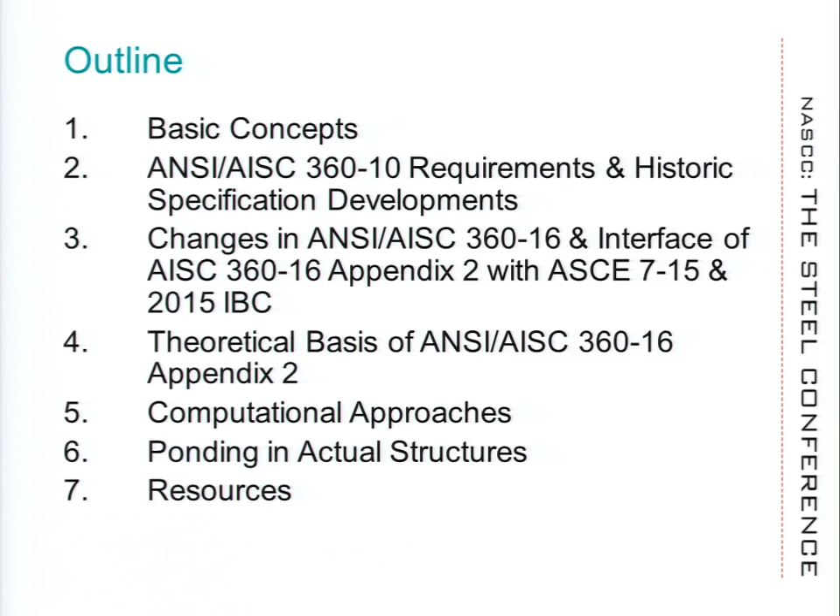Starting off with ponding, the first definition is from a roof contractors association point of view. It says that ponding is water that remains on the roof 48 hours after a rain event. That's not the ponding that we're interested in as structural engineers. There are other ponding definitions.

One that comes out of the SJI Technical Digest starts off with ponding being a condition where you have uncontrolled water and it changes the assumption of your design. That's not really a very good definition of ponding either. AISC has a definition that says it's the retention of water solely due to the deflection of the roof.

We tend to look at ponding as a process that causes progressively increased deflections that eventually would stabilize, hopefully, or lead to collapse. And we'll look at the conditions where one occurs versus the other.

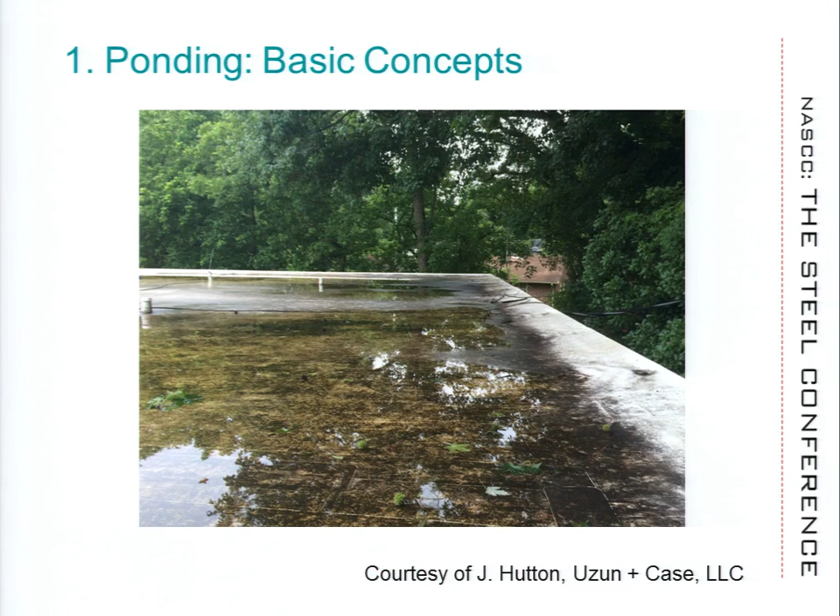Just a slide of what ponding looks like. This would be a kind of roof condition where this water stayed more than 48 hours, where it didn't cause any issue. It represents a condition where the roof got into equilibrium.

Basically, the idea of ponding is you have a nominal deflection due to an initial load. Due to that deflection, there's rainwater that accumulates. It deflects further. More rain results in more deflection, and the cycle either stops and converges, maybe because the rain event has stopped and there's not enough water, or the structure is designed such that the rainwater just overflows. So your input is equal to your output.

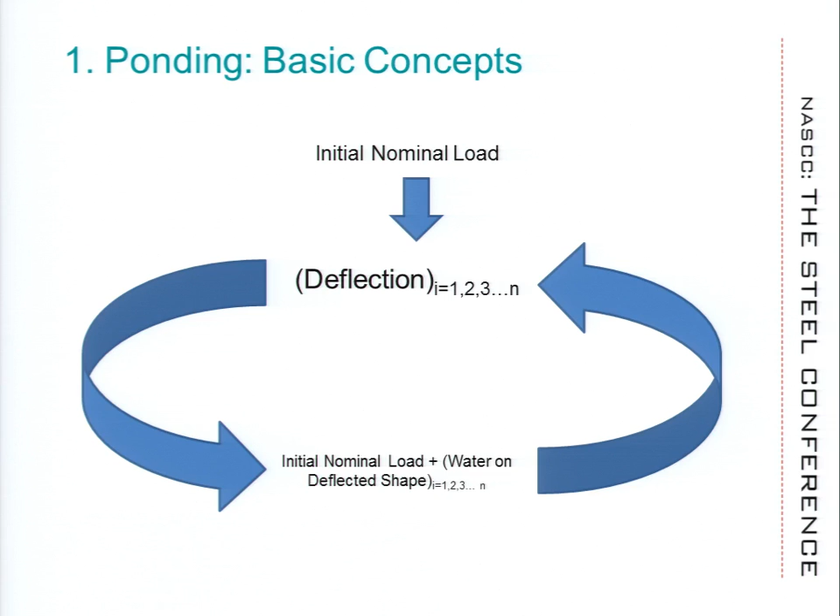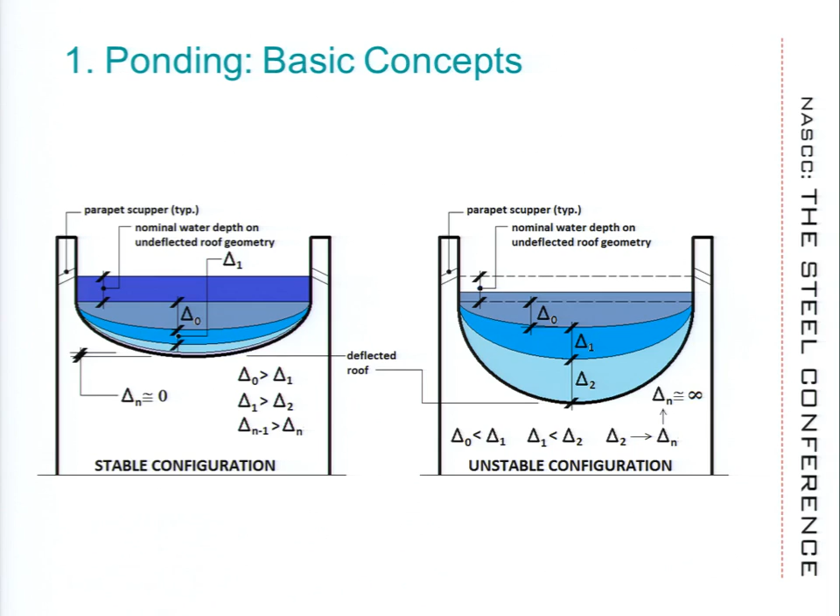Graphically, that's represented in these two conditions, where on the slide on the left, the water is overflowing through the scuppers. On the one on the right, the deflections get progressively larger, and the water never reaches the scupper height. Eventually, the deflections become unbearable, or it results in a collapse.

There are numerous causes, starting off with clogged drains, inadequate drains. Sometimes ponding is due to an abrupt change in stiffness, and that is the condition that has really caused us to look at these provisions hard again: where you have a slope that comes up against a change in stiffness, you hit a wall that is unyielding, and you tend to get ponding on the backside of a wall if the members are parallel to the wall that is unyielding.

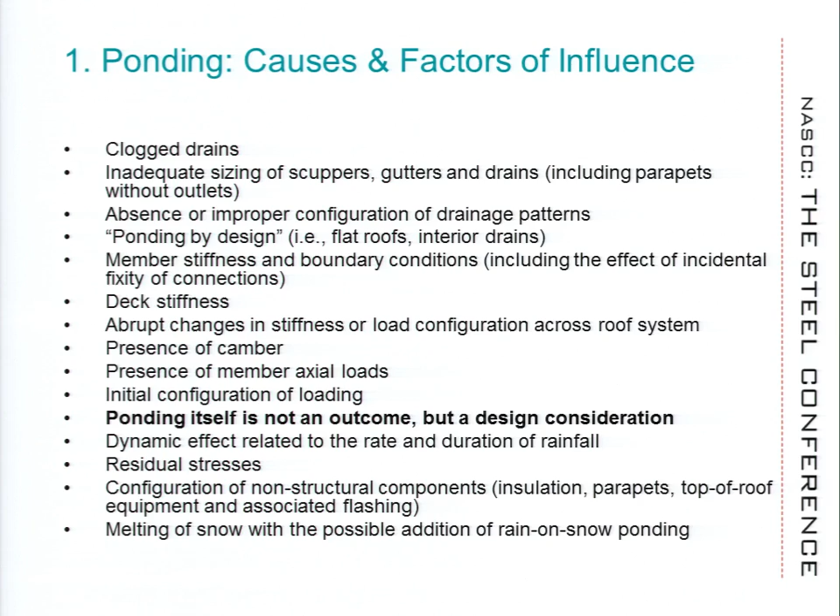In order to correct that, we go through what our provisions have been in AISC and how to correct these issues. So we understand that from a ponding perspective, you need a sufficient supply of water on a flat, flexible roof. The result of that could either be system stability, where the water inflow is equal to the outflow through the drains, or you have insufficient amount of water, the rain just stops, there was not enough volume of water, and it doesn't cause a collapse.

Or on the other side, you have system failure due to an instability or because you don't have sufficient strength. Some people look at ponding as a serviceability issue in terms of water leaking through the roof and standing water deteriorating roof membranes. That's not the focus of our talk. Neither is the condition of concrete ponding, which also occurs when you're placing concrete on a frame slab.

As we review the AISC codes, we're just going to focus on what the provisions say about the mitigation of ponding. I want to think in those terms: what stiffness requirements the code imposes on us, and what strength requirements the code imposes on us. So as we go through this, think in those three terms: mitigation, where if there is no accumulation of rainwater, there is no ponding. With certain stiffness provisions, you can make sure there is no ponding, and then with those stiffness conditions, you still have to meet strength conditions that make sure your beam, your framing system, is adequate to handle the loads.

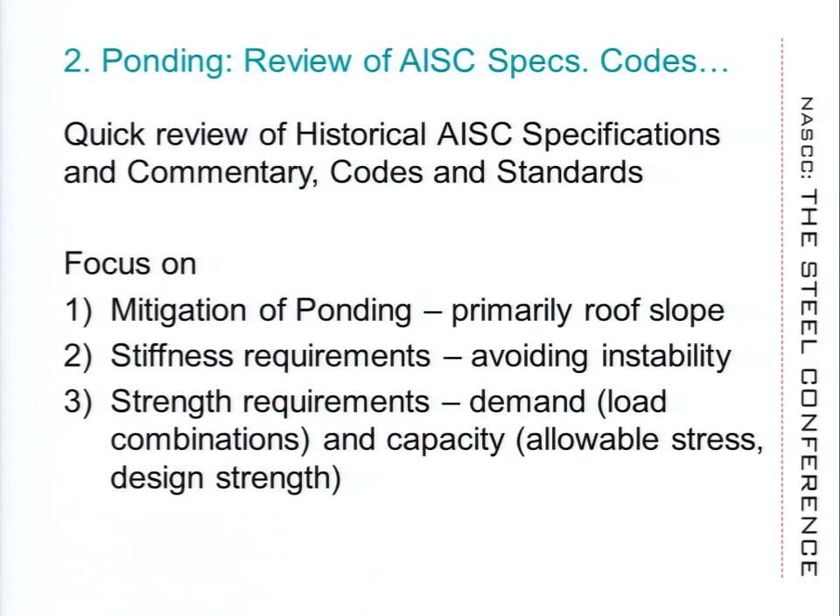So we're going to look at this really quickly through the AISC spec. The first mention of ponding in an AISC spec was in the commentary of the 1961 spec, and it was a very crude definition. Basically, it said depth of beam, or span length to depth of beam, should not be less than Fy over 1,000,000. You can see the problem with that in terms of a W14x16, W14x26, W14x730 - it had the same criteria. That was not a very good definition.

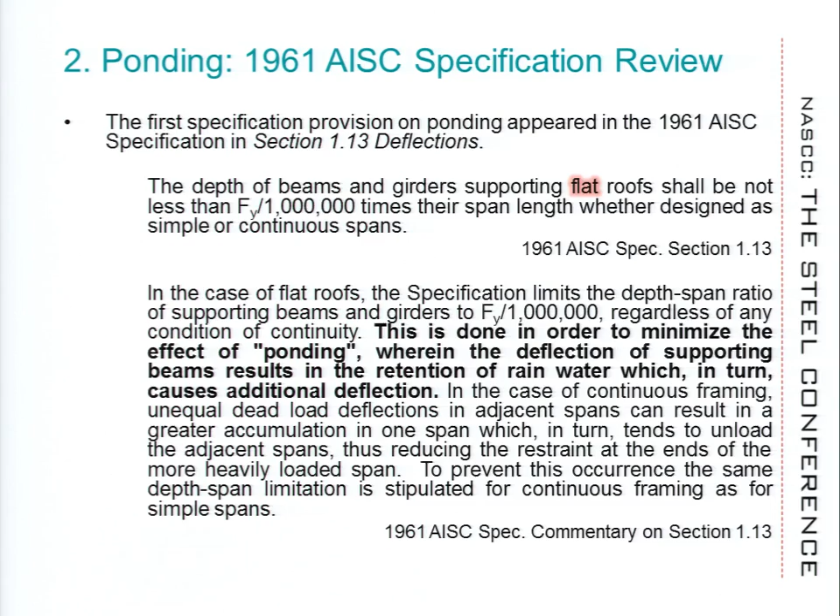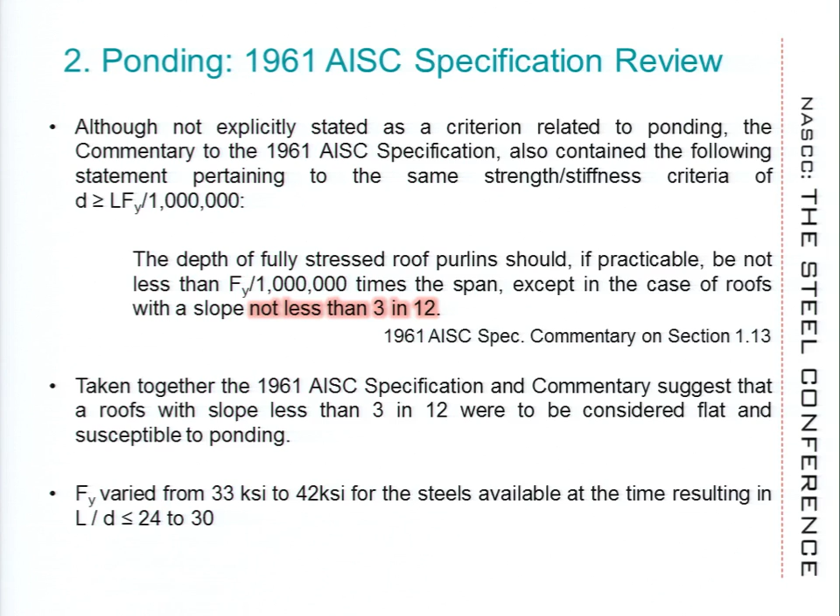The other thing in the commentary at that time was that if you had a roof with a slope of 3 in 12, you didn't need to worry about ponding. That was mentioned in the commentary of the 1961 spec. So taken together, there was a definition of a flat roof, if you read the provisions together, and that flat roof was anything less than 3 in 12. If you were a flat roof, you had to meet that definition. Just to give you a historic perspective, that amounted to an L over D of 24 to 30, depending on the yield stress of the steel.

The '63 spec came out, and they said Fy over 1 million wasn't good enough. They came back and said it should be Fb over 600,000. That is not much better. It still had the notion of a 3 in 12 roof to mitigate ponding - if you had 3 in 12, you did not have ponding.

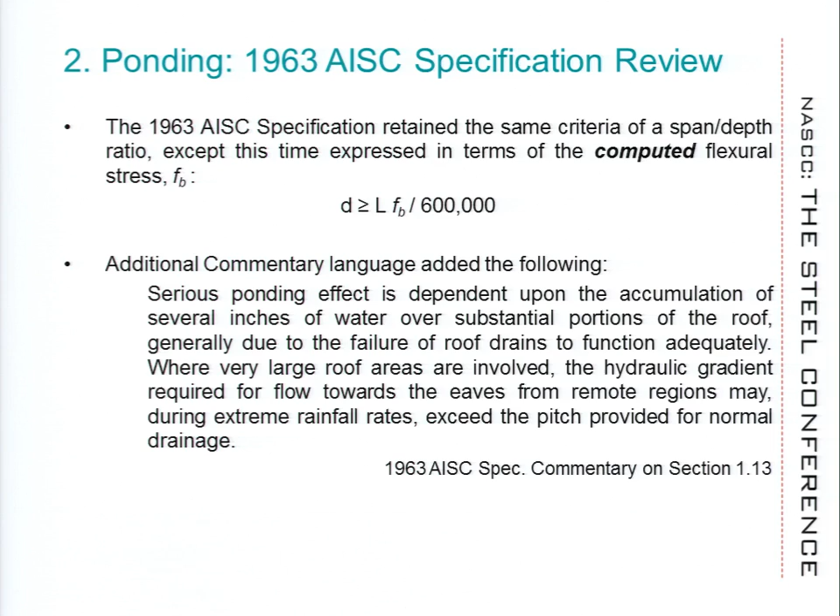The '69 spec resulted in a major change from that thinking, and that is what we have today. In that decade, there was a lot of research done by Haussler, Bohannon and Kuenzi, Chinn, Marino, Moody and Salama, and Sawyer. JR will go through some of these approaches in detail, but all of them had the notion of a critical stiffness of a simply supported beam - that was simply the load, gamma being the density of the fluid or liquid, S the tributary width, giving you a load per foot, L to the 4th power divided by pi to the 4th. That represented an idea of critical stiffness. If the stiffness of the beam was larger than this quantity, you would not fail in an instability of ponding. If it was less, the potential to have runaway deflections, if you had sufficient water, is there.

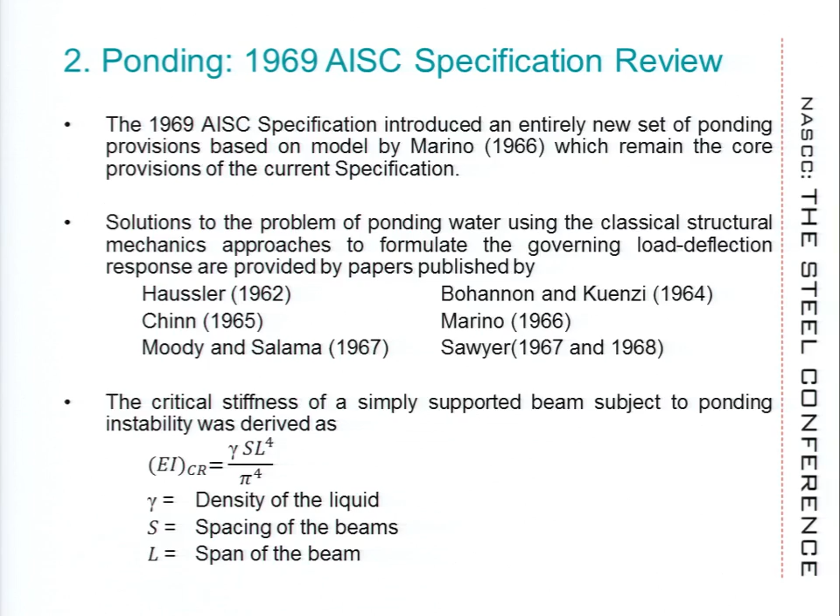There is the notion in the first paragraph that says if you have sufficient slope - but sufficient slope's not defined here anymore - and the idea is, if you don't have sufficient slope, in order to assure stability, meaning to get away from instability, you had to meet this equation of Cp plus 0.9 Cs less than 0.25. You can think of these as flexibility coefficients, and that in the commentary is represented as yielding a factor of safety of 4 against instability due to ponding. So the 0.9 factor on this is not documented anywhere in the literature.

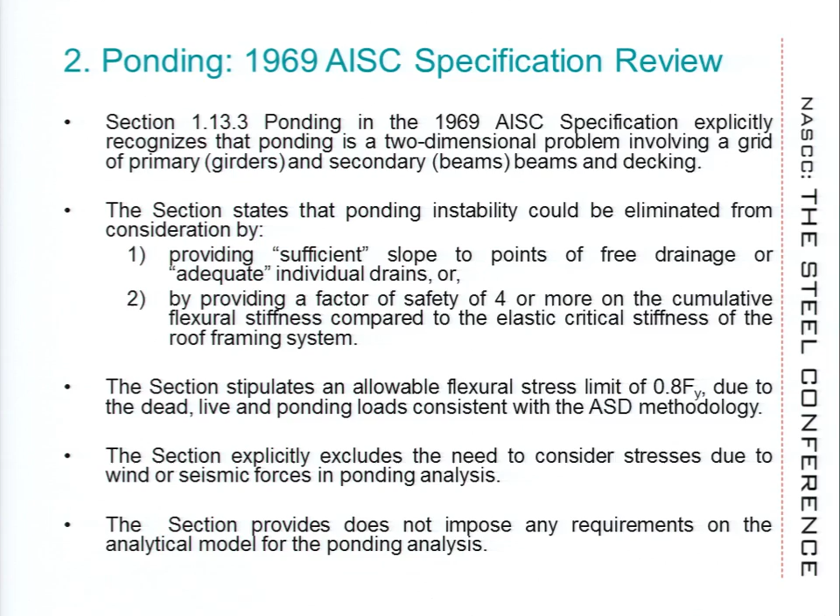This set of provisions has made it through AISC specs essentially all the way up to now. There was no definition, like I said, of what sufficient slope was. In the commentary, it reads really awkward, and I stared at this commentary for a long time. I think that in the committee work, basically it says the opposite of what they intended to say. You can read it and reread it, and it just says the opposite of what was intended. When you have the slides, you can look at that.

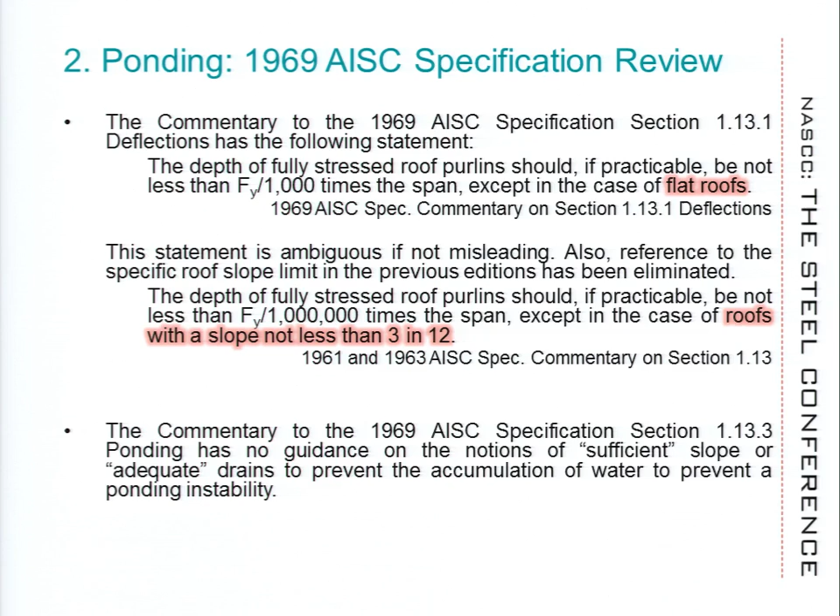They changed the slope from 3 in 12 to flat roofs. I think it should have said for non-flat roofs.

There was a provision accompanying the provisions in the commentary that was based on Marino's approach from 1966. Marino was an AISC research engineer at the time, and his method was to be used if the ponding check, C sub P plus 0.9 C sub S less than 0.25, failed. For most roofs that we design today, it's very difficult to satisfy that and still be economical. Most roofs fail that test.

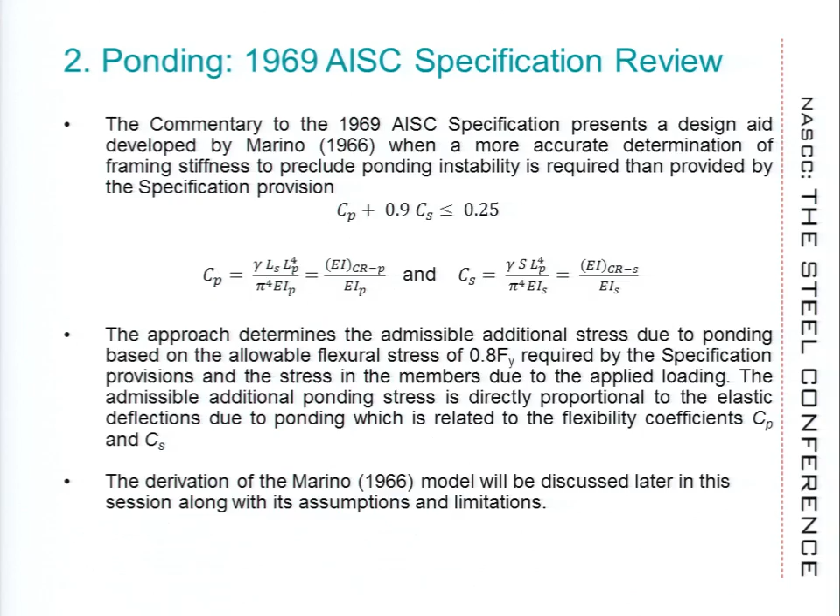Marino is the source for the 0.8 Fy, and he just arbitrarily says in his paper that using a factor of safety of 1.25 is good enough for ponding in his view. So that's where that comes from. It's inconsistent with the AISC spec, it's inconsistent with the LRFD reliability approach, and that's the way it is. We'll see how we struggled with it.

These were the charts that accompanied that. It was a graphical design aid in the commentary of the 69 spec, and you calculated a stress index, and that's where you see the 0.8 Fy, either for the primary and the secondary member stress indices. The procedure is quite clearly described, well described in the commentary. I don't need to go over that.

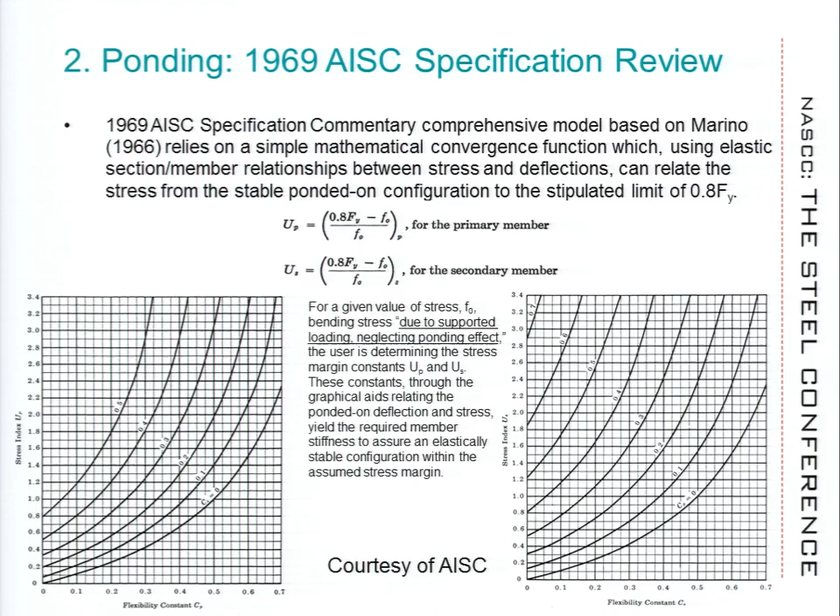The issue of why 0.8 Fy - I looked hard for that, and it just seems to be that they wanted to provide a factor of safety of 1.25. It's an abnormal event, and some sort of one-third stress increase over 0.6 Fy may have yielded the 0.8 Fy. We don't know.

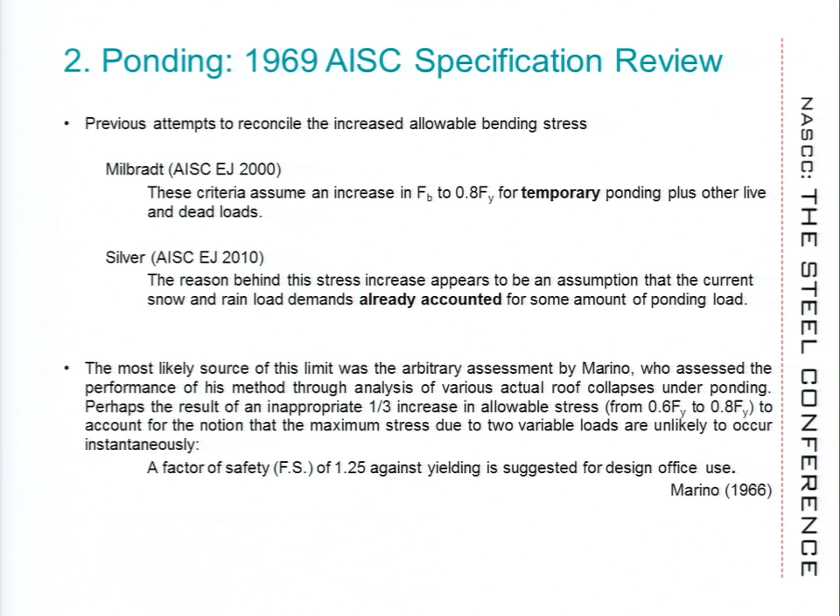There are people, Milbradt for instance, in 2000 refers to the Marino 0.8 Fy as a temporary ponding stress. That could be it. Silver, in an AISC engineering journal article, says some of the ponding is already accounted for in the rain loads, and that's why you can use 0.8 Fy or a 1.25 stress increase. It could probably be just an inappropriate use of the idea of one-third stress increases, which was common. There's a paper by Duane Ellifritt who talks about how in that period of time, it seemed to have been very common to have this one-third stress increase for abnormal events.

The ponding provisions essentially stayed along this when AISC came out with the LRFD spec in 1986. The interesting thing was that Marino's approach, which was a graphical aid, now became part of the main spec. Marino's example was a very crude, very limiting, approach filled with assumptions, but it is now part of the main AISC spec.

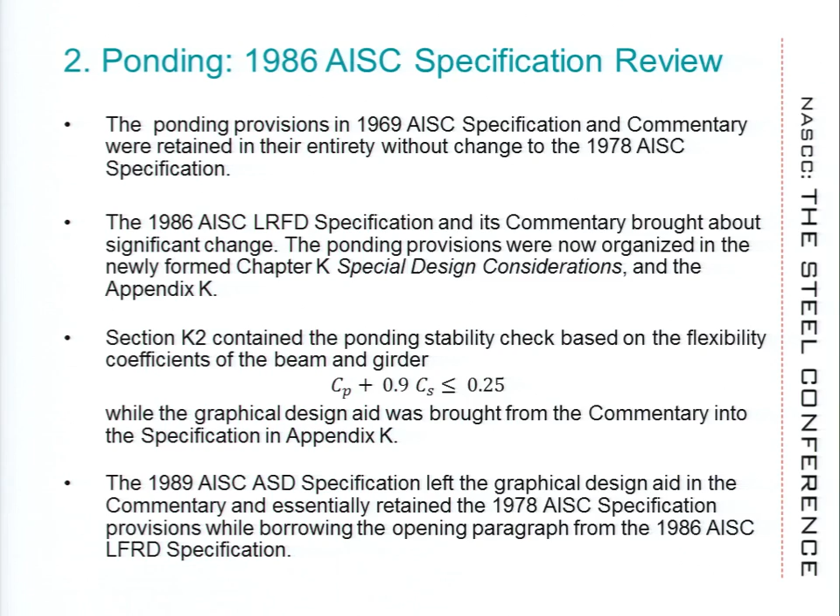The 89 AISC spec that came after the 86 LRFD spec left the graphical procedure in the commentary - it was not part of the main spec. Just slight implications to that. The other important distinction was that the changes on the analysis changed from rational analysis to structural analysis.

The assurance of stability became an assurance on adequate strength and stability. The language regarding checking for 0.8 Fy on the bending stresses went away. So one would have to assume that the intent was just go back to chapter B, which says the resistance needs to meet or exceed the demand, and I guess that's what they relied on. No longer did we have any limitation on the bending stress.

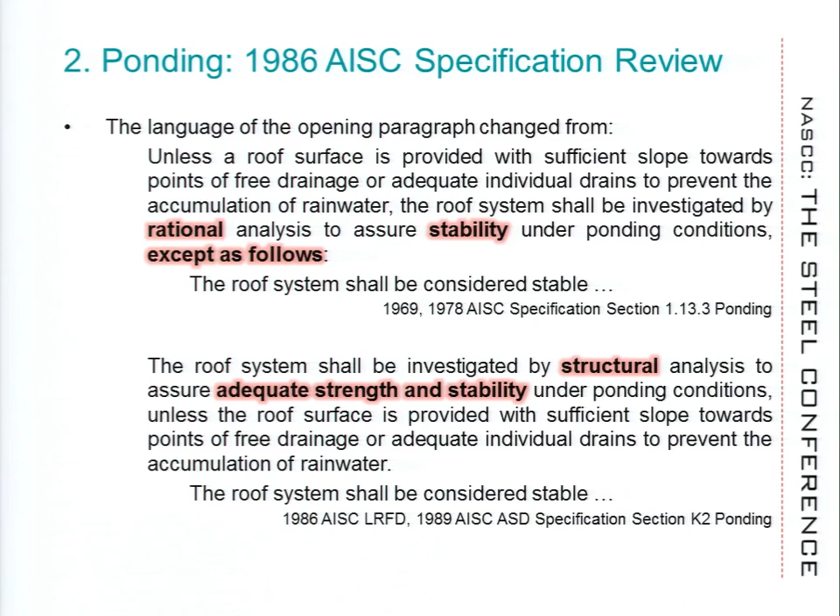The LRFD spec that first came out replaced the 0.8 Fy with phi sub b for bending, which was 0.9 at the time. And the F sub 0 went from calculating for a load case of dead plus R, D plus R, to 1.2 D plus 1.2 R. So there's a minor change in that language, and we'll see as the editions have gone that that was an uncomfortable equation right there, and it was changed again.

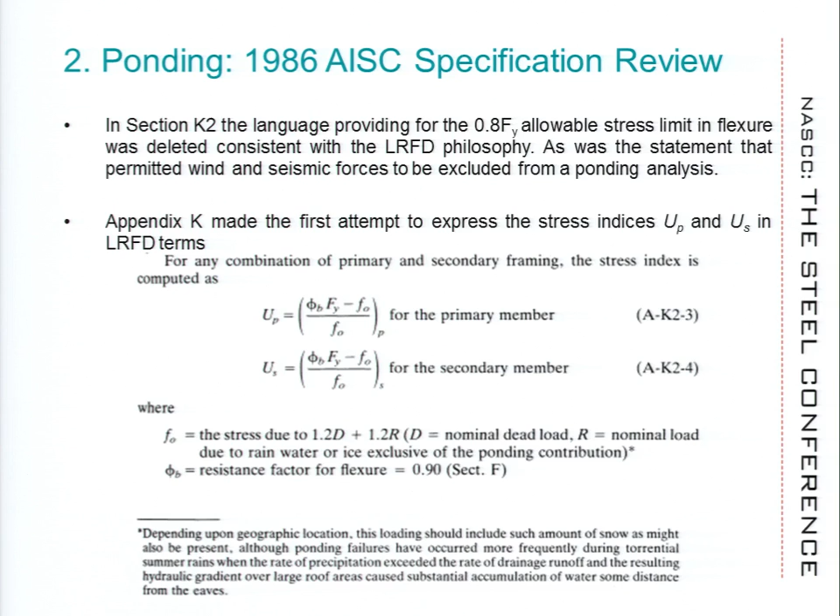The 1.2 D plus 1.2 R that was mentioned in the ponding provisions is inconsistent and conflicts with the earlier section of the same spec, where it very clearly said you need to use 1.6 R, based on that. If we had done it and looked at it properly, we probably would have replaced the F sub 0 term for LRFD in terms of nominal capacity, etc. But it was not done. That's where we are.

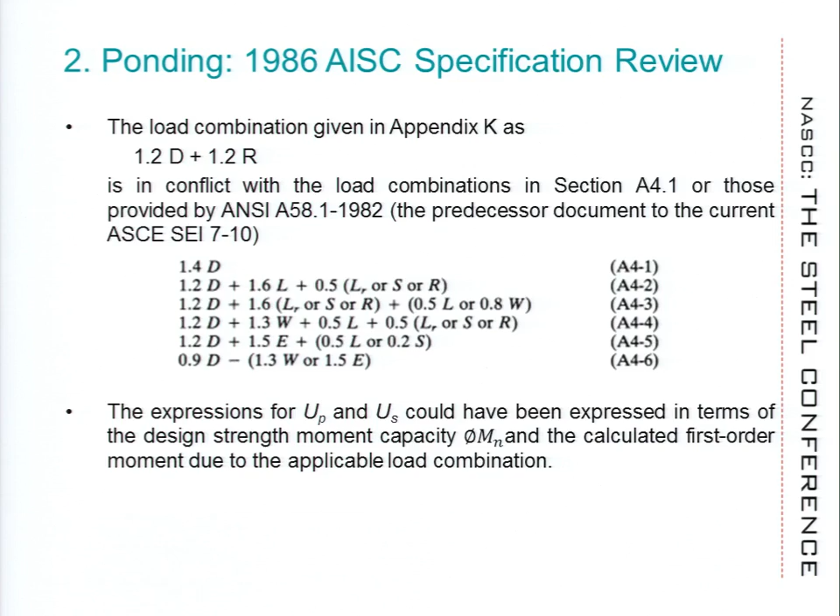The 93 and 99 spec took the phi sub b off, and went to Fy minus F0 for those changes. There's no indication in the commentary as to why that was done. That's not where it ended. We'll come to that in a little bit later.

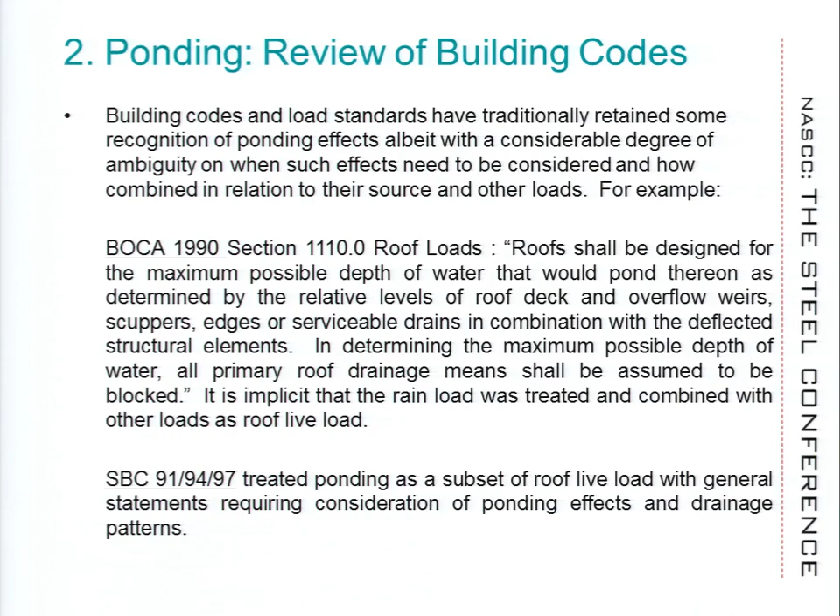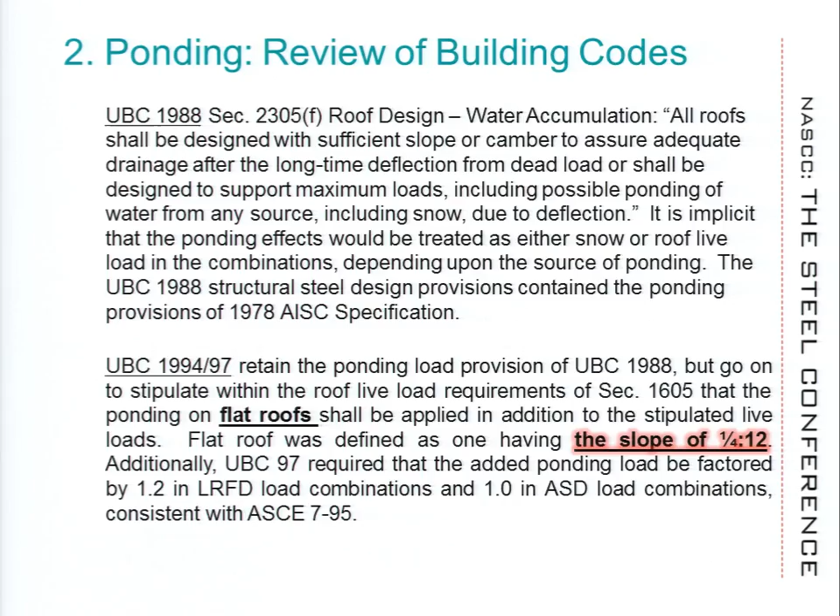BOCA, SBC, the building codes - I went back and looked through what they say about ponding. And the idea of mitigating ponding through a certain slope is always there. The idea of a quarter inch per foot evolved after the 60s, and the quarter inch per foot would be found in the commentary, but not in the spec. Until UBC came about in '94, where they defined that if you had a quarter inch per foot in the main spec, then you really didn't have to worry, or they said ponding is not required to be checked, very loosely. That was in the same time period.

Let's look at ANSI A58.1, which gave us the loads. There were no load cases separate for rain or snow, and live loads included rain and snow. We're not very clear what is meant here, whether the snow, ice, and live combine in one load combination or not - you cannot make it out. So you look at those load cases, and from there you don't get the 0.8 Fy either - that was allowed, that was mentioned. So it's not consistent with the combining of loads, and the commentary to the ANSI document actually very clearly states that a stress increase should not be permitted.

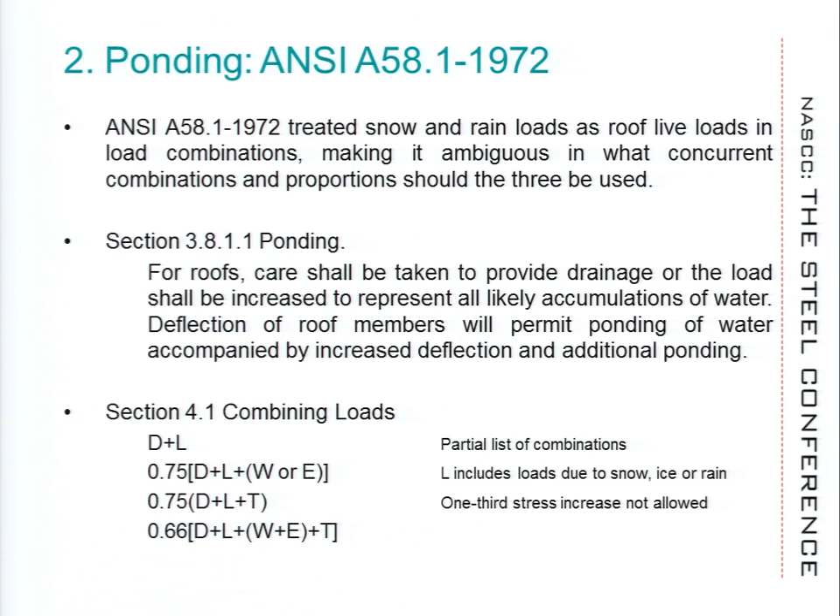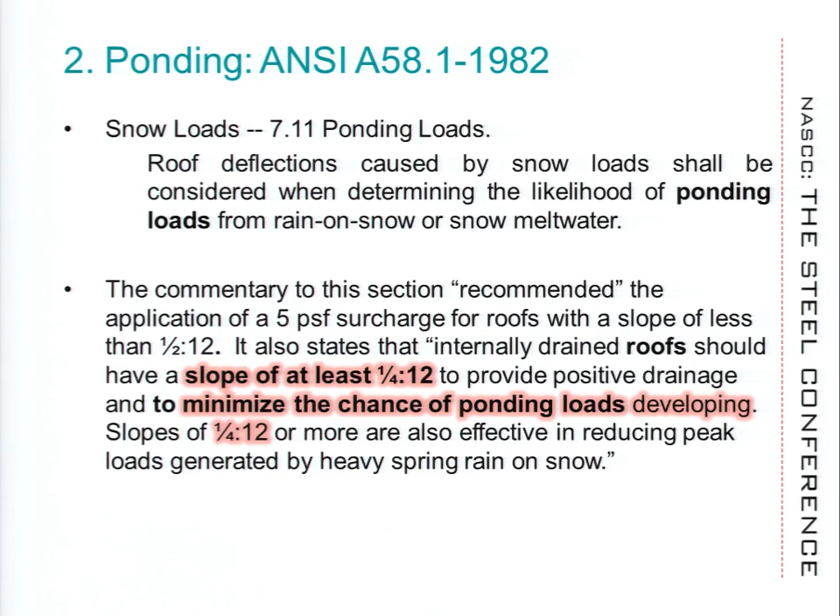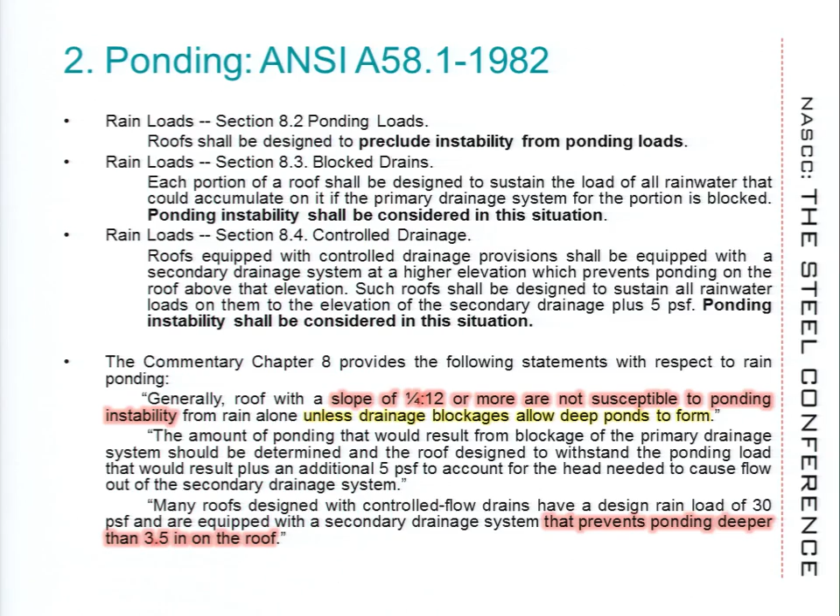The '82 version of A58.1 again says in the commentary, not in the main spec, that if you have a quarter inch per foot, you were minimizing the chance of ponding loads. Everybody latched onto that, and typically you saw designs where you had a quarter inch per foot and nothing else was done. The wording is really very poor in terms of the commentary. You read, when you get these slides, you can read through it. It doesn't really tell you much.

The '82 provisions of ANSI were a little bit - there's a remarkable feature in there, in that it required you to consider the rain loads at a load factor of 1.6, but the ponding component, the additional load that you get from the deflection, was to be treated with a load factor of 1.2. And if you try to do this numerically and you're trying to have the computer do it, this is an extra step that causes a lot of grief. But subsequent documents that talk about ponding have all gone back to 1.6 as the load factor on rain, on ponding as well.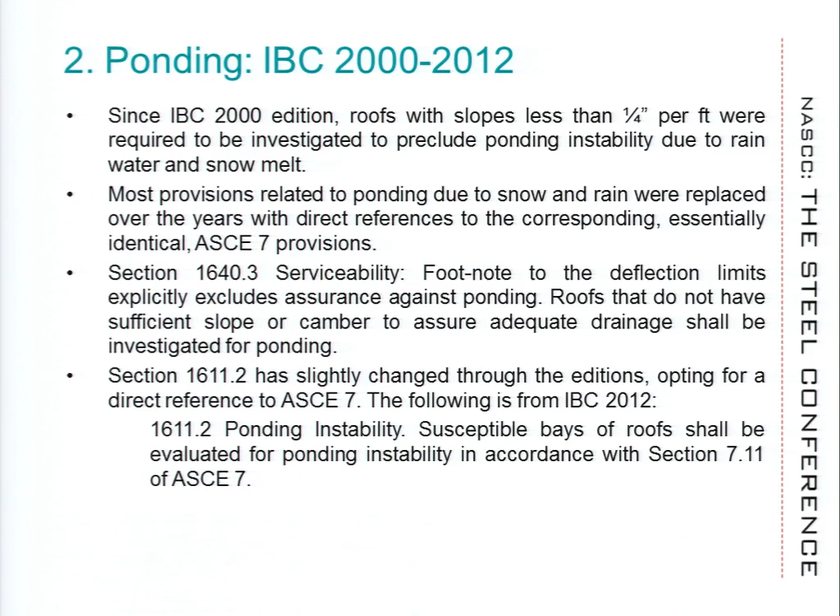The IBC documents from 2000 on all picked up on the quarter inch per foot that the UBC started off with. And the IBC has evolved to a point now in the 2012 edition where you have the notion of susceptible bays, but they are all very clear that if you have a quarter inch per foot - that originally in some documents said a quarter inch per foot directed to a free edge - you don't have to consider ponding. That directed to a free edge has also gone away in certain documents. You have to be very careful about that. And a quarter inch per foot, we have now seen examples where a quarter inch per foot does not preclude ponding.

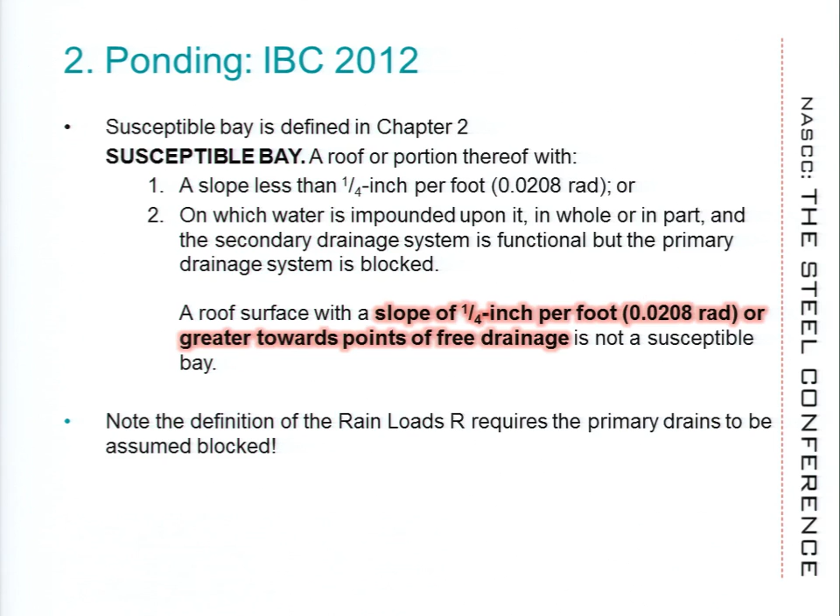These are all definitions that are from the spec now. They are no longer - since the '94 UBC, the '95 ASCE 7-95, the IBC 2000 onwards - the quarter inch per foot is actually not just a recommendation in the commentary, but is a main spec provision.

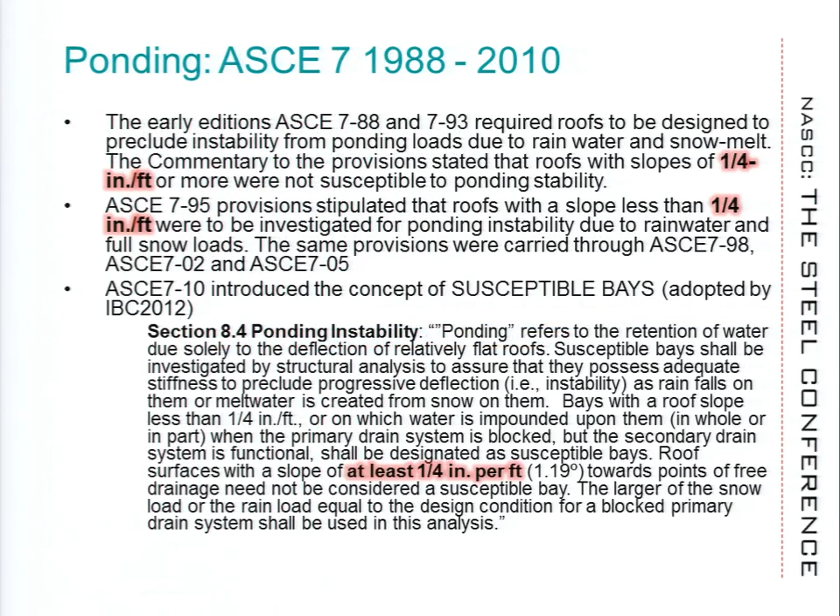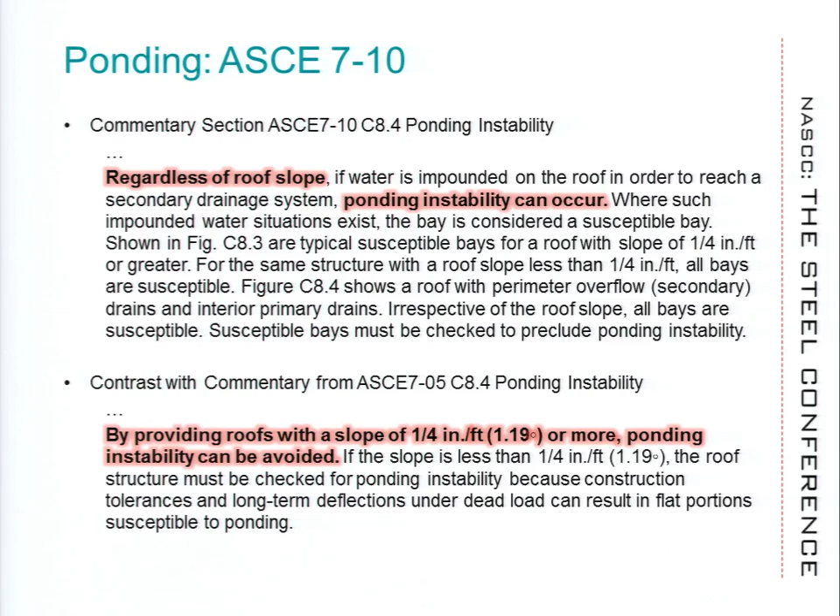The interesting thing is that while that is a main spec provision, the commentary on ASCE 7-10 says that regardless of roof slope, ponding instability can occur. So they tell you in the spec that a quarter inch per foot will kind of preclude ponding, but the commentary has started moving in the direction of be careful about that. It's because there are examples now that show a quarter inch per foot is not sufficient to preclude ponding.

Where we are today with AISC 360-05 and 360-10 is essentially the same. It says a roof system shall be investigated through structural analysis if we do not meet this quarter inch per foot to a point of free drainage. This is probably correct except for one condition where the secondary members are probably parallel to the roof edge and there's a change of stiffness in the girder direction.

The two provisions, the simplified ponding approach, C sub P plus 0.9 C sub S, called the simplified approach, is in the main spec. The Marino approach, the graphical aid, is also in the main spec. So basically, there is a safe harbor in the provisions today: you don't have to check instability due to ponding under certain conditions if you have a quarter inch per foot. That has made itself known, again, in the UBC 94, ASCE 7-95, IBC 2000, AISC 360-05, and all documents. It's not just in the commentary of these documents, it's in the main provisions.

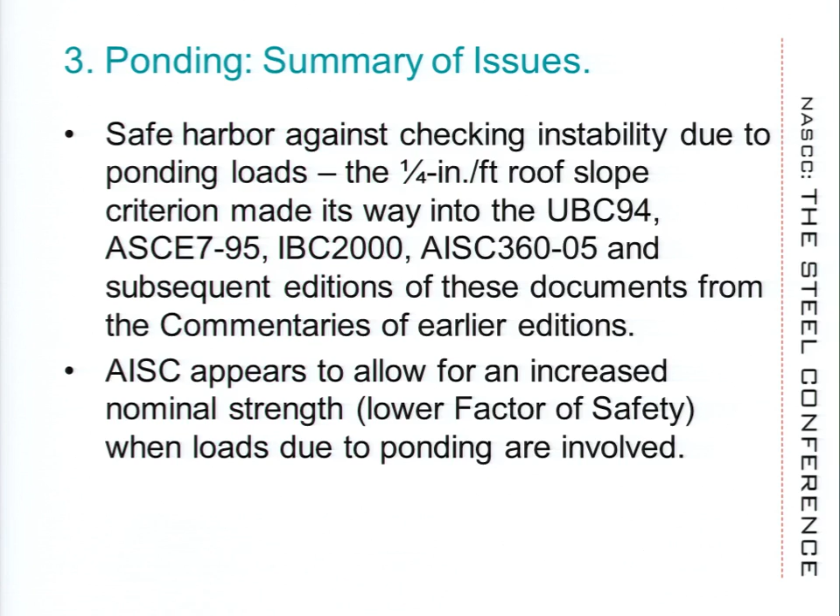And the AISC provision seems to have allowed for the lower factor of safety or whatever. It's inconsistent with the reliability of the LRFD approach because they have gone back in the 360-05 and 360-10 documents to the old ASD formulation of that graphical aid, which now explicitly shows the 0.8 FY in those charts.

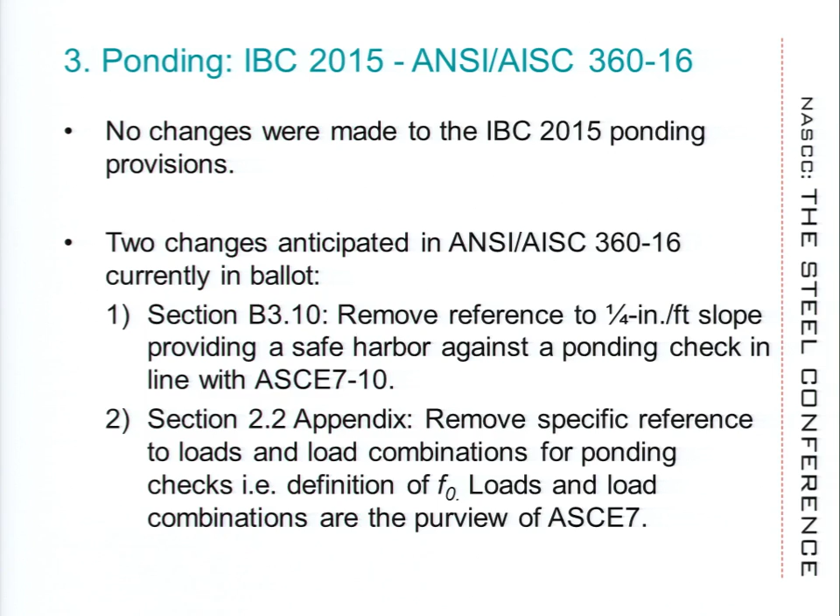There are no changes in the IBC 2015 edition that just came out. There are two changes that should be anticipated in AISC 360-16. One is the removal of the reference to the quarter inch per foot slope as a safe harbor. The other part is we've explicitly removed any guidance or requirement on what those loads are to be used when you use the graphical aids, with a reference that leads you back to the loads that come through ASCE 7.

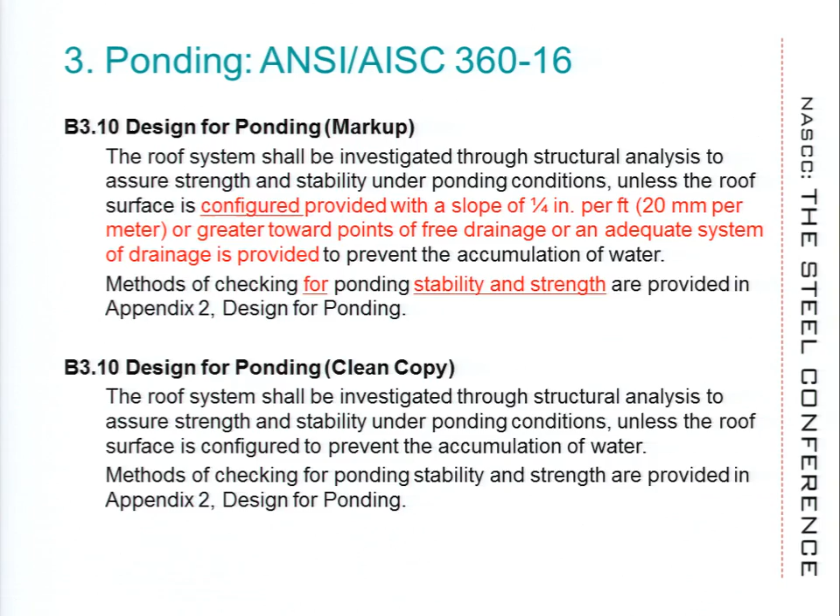The markup is also included on the slide with what was deleted, and unfortunately it seems like the strikeout lines don't show on this thing, but what is underlined is new language. What is in red should have been with strikeout. The bottom is a clean provision, clean language. And then the changes, that's where you see the 0.8 FY has been left in.

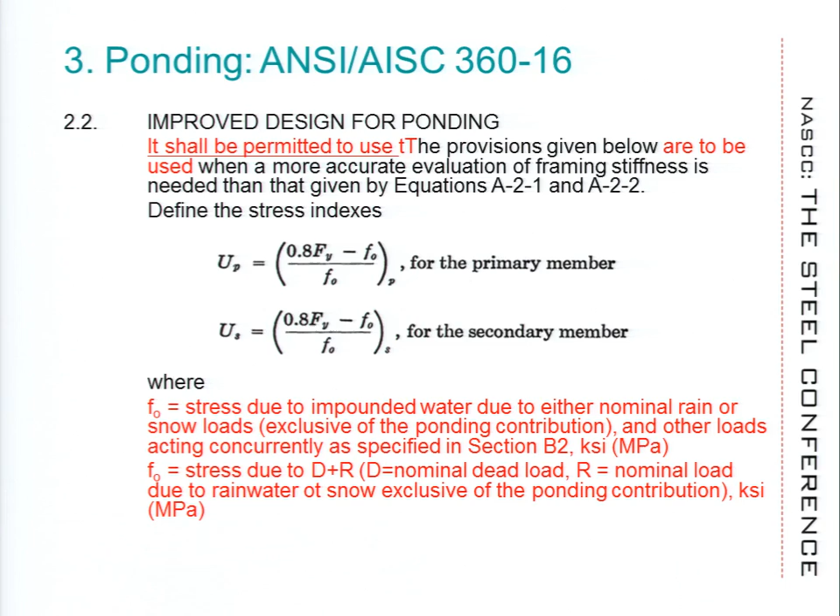And now we come to ASCE 7-15. There's a debate going on in that organization to remove the safe harbor against ponding on the quarter inch per foot. They may come back and say it only specifically applies to members that are parallel to the free draining edge. There is a huge debate going on the term susceptible bay. It used to be only two conditions, now it's about five or six conditions long.

And there is the notion that engineers are not accounting for the second order effect of the added load due to ponding when they're doing their designs. So they want to be a little clearer in the notion that ponding results in the R load that you calculate, 5.2 times the height of the drain, et cetera, that load actually increases based on the flexibility of your roof framing system. The ASCE 7 committee is seeing where engineers are not accounting for the additional water load, so they want to be clear about that. In my mind, if there's water being held, there's always the notion of additional load, and you have to check for that.

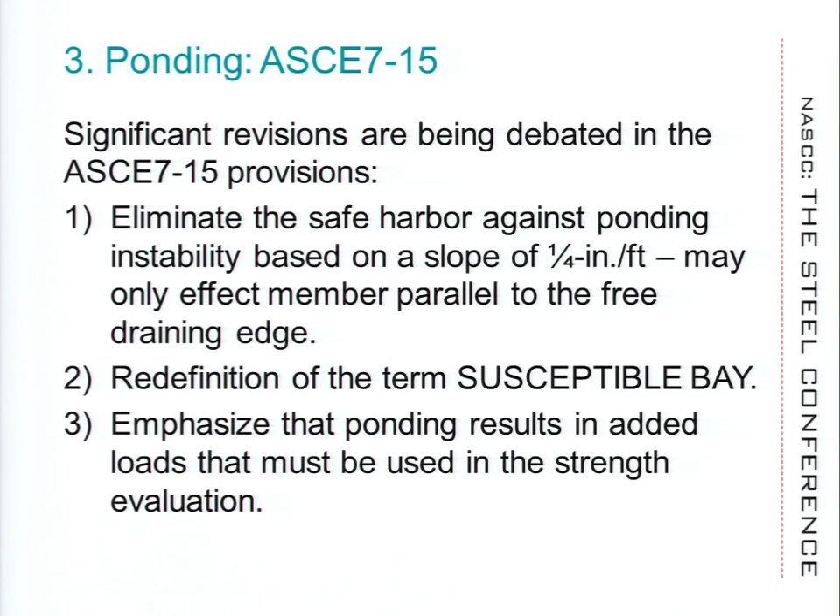At this point, I'm going to hand over to JR, and he's going to go over the derivation and the mathematics behind the provisions in the code. We'll take questions after his presentation.

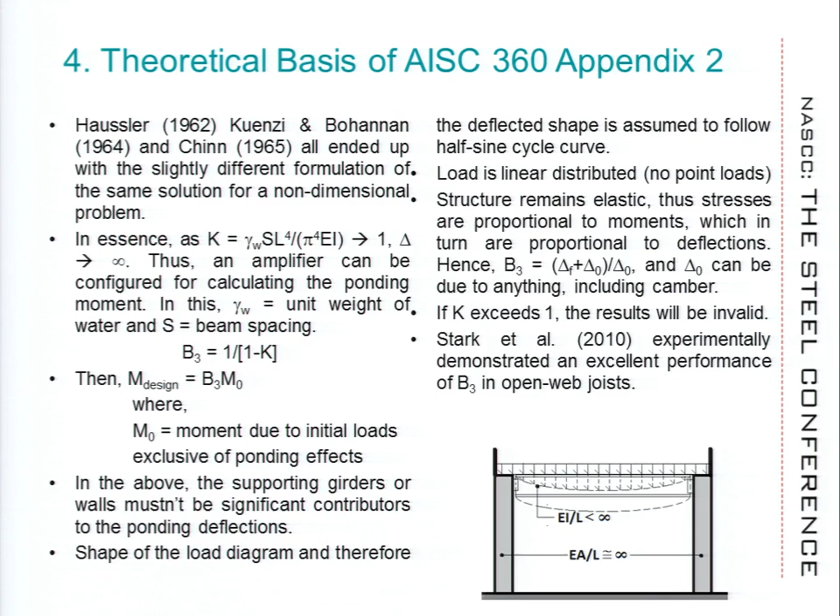It's a one-dimensional problem. It's a very simple thing, and this is still relevant today. If you have an engineering problem such as the one shown in that picture, you can still solve a ponding problem using this equation.

A couple of years later, maybe a year after Chinn, a discussion was published in the AISC journal where somebody pointed out, well, that's all nice, but typical framing applications include support flexibility - in this case, particular girders. So how do you account for the flexibility of the girder on the overall ponding behavior?

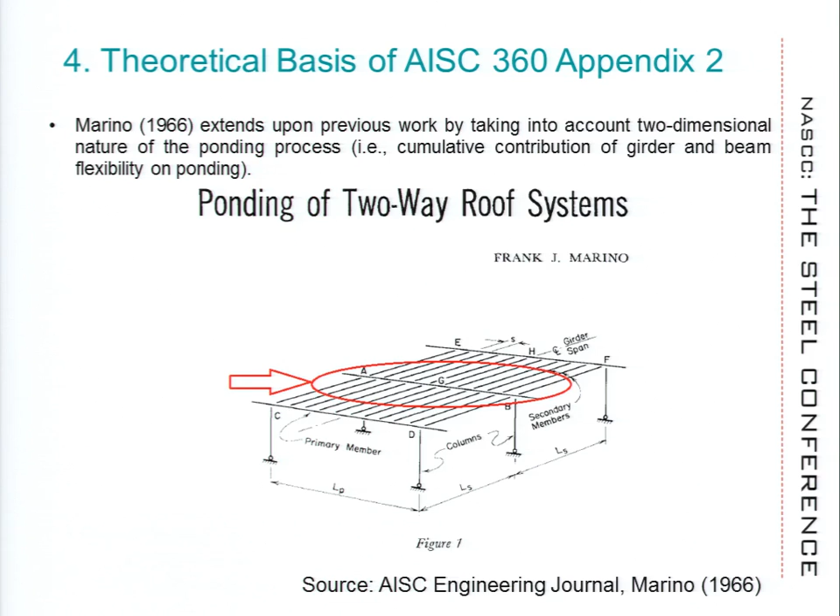So Marino, who was an engineer with AISC at the time, extended this very particular solution of a very particular problem to what you see in this image. I'm showing this on purpose because everything that's today in Appendix 2 is based on this very geometry, this very particular specific geometry.

So after you go through a simple exercise of defining what your pertinent variables are - you have LP as the span of your primary member or girder, LS as the span of the beam framing into it - and assuming the girder supports equal beams on both sides of the bay, that the roof is perfectly plumb and flat, and that beams are sufficiently uniformly distributed so as to meaningfully simulate a distributed load and not a point load, you can describe the load condition in terms of deflection for both beam and girder.

One thing to take away from this is that they're codependent: the converged loading condition on the girder depends on the displacement of the beam, and the other way around.

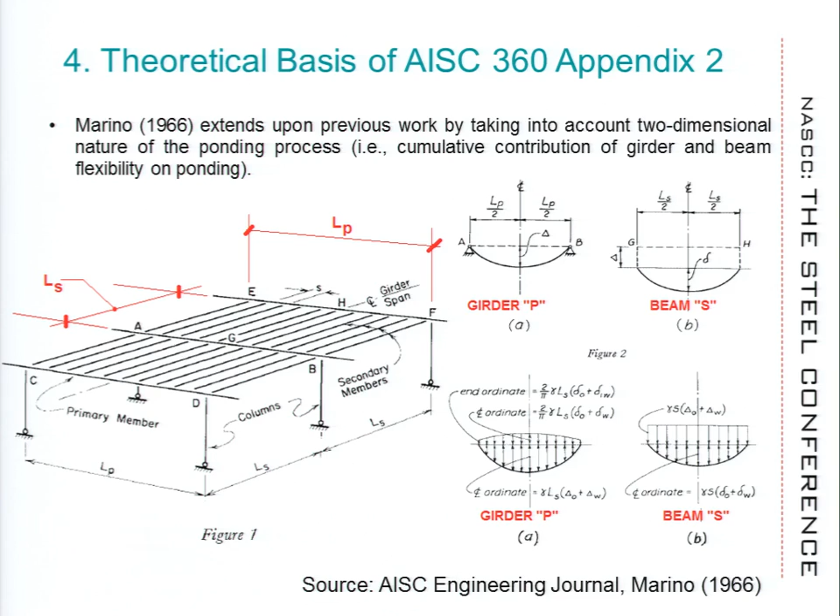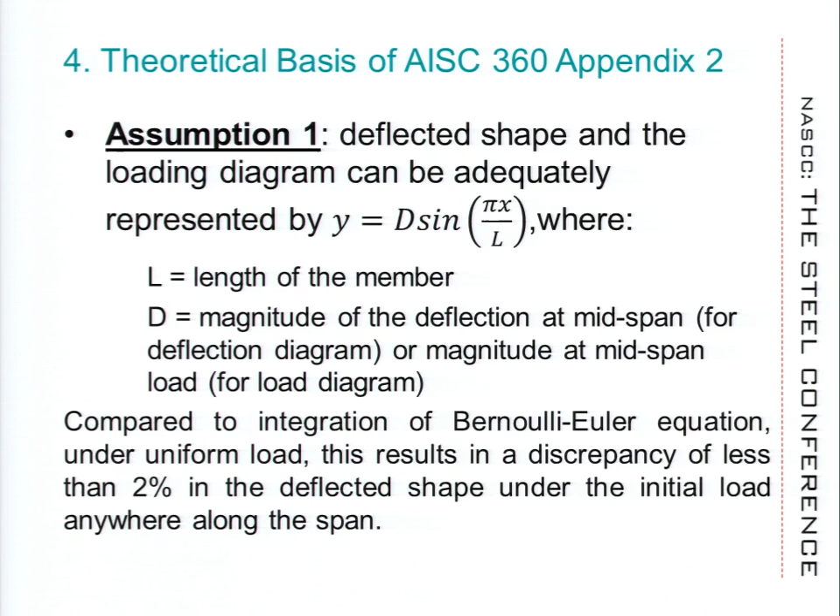Everything you see here is somewhat intimidating if you read the paper. However, it's really simple geometry, it's really a geometric problem, and beyond that it's really a statics problem. If you integrate the area under that curve, you get 2LD over pi, where D can be either the magnitude of your load or the magnitude of your displacement, depending on what you're looking at. That'll appear in this development over and over again.

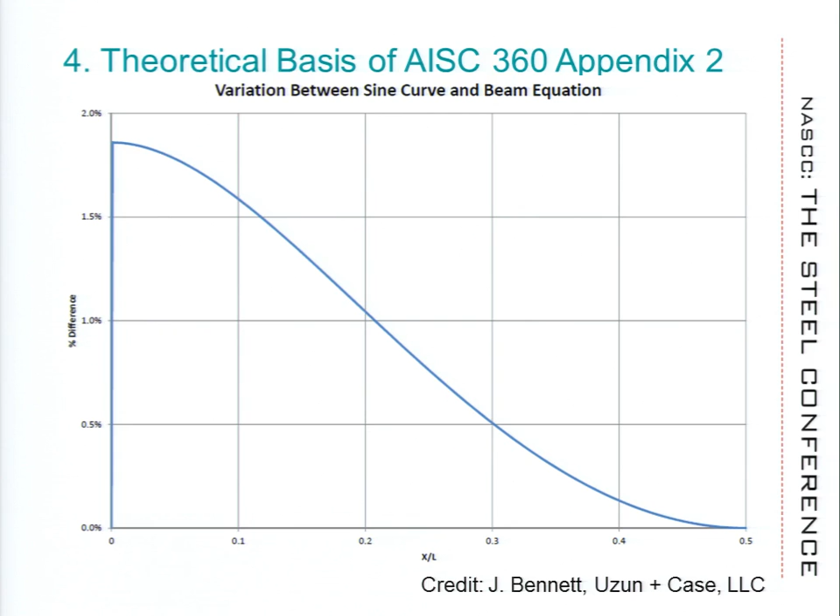At the initiation of instability for a stability-critical system, again there's about 2% difference in the critical load. So again, it's nothing. This assumption that you can represent every loading condition by a half-sine diagram is not really correct - it depends, in all cases, on what your actual loading is. You just have to think about it. In some cases, if you have a framing configuration that conveys your ponding to your girder through a beam that's very sparsely spaced, you could have conditions where this kind of gets out of hand.

However, if you have uniformly spaced beams, it can actually be shown that it is conservative to represent your girder load as a uniformly distributed load on both sides, assuming you have equal beam spacing and equal beam spans on both sides. It's because you lose this portion of the load, so the resultant winds up being less.

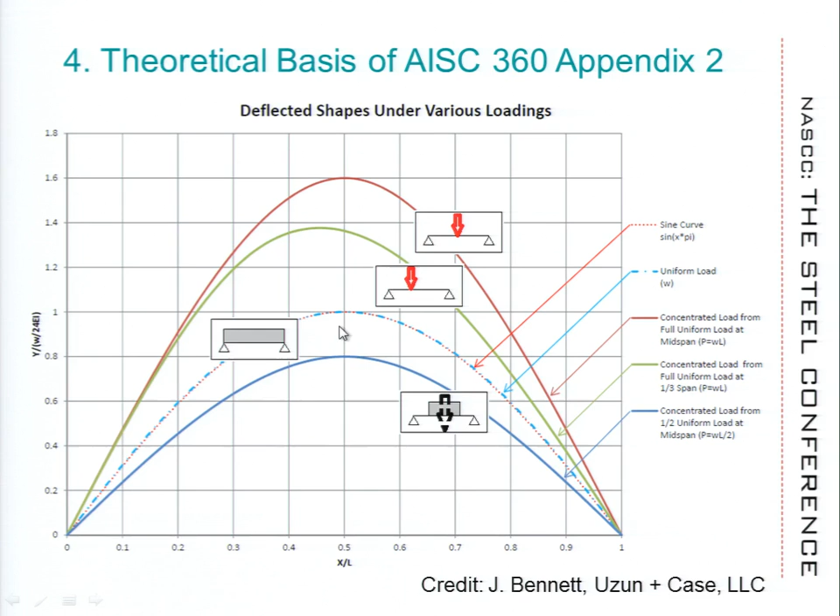All right, you're going to have a lot of math here. You can go through these slides later. I'm not going to read the equations for you, but I've gone through and derived absolutely everything that's in that paper, so you can follow these computational steps relatively easily.

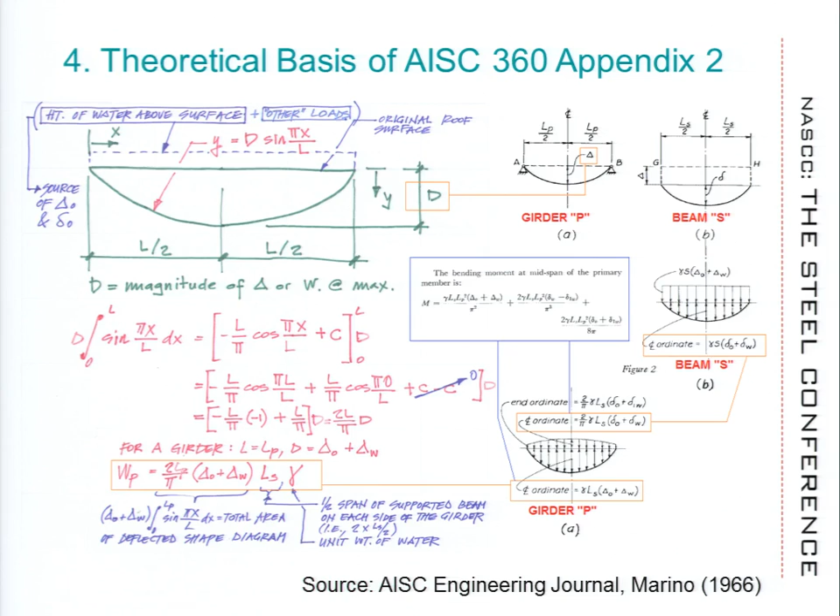But again, the benefit of using the sine pi x over L function is that as you integrate these things, as you find centroids of the area, the pi's just keep compounding. So as you go down the path of determining moments and deflections, your pi's will raise in power, but the simplicity of the function remains relatively simple.

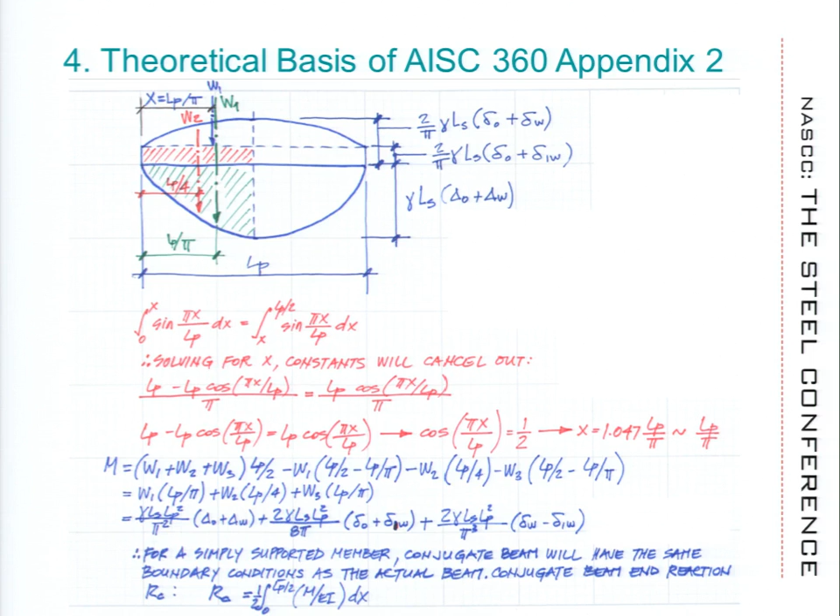So if we ascribe that load in terms of the geometry of the displaced beam and the geometry of the displaced girder, we just go through the process of doing statics. I mentioned that Chinn used the moment area method, derived in 1873. Frank Marino used the conjugate beam method, which I believe was derived in 1865 - this is really old. They didn't have calculators, but this resembles an undergraduate homework. All of us have taken structural analysis.

This is one of the things that for some reason they still teach - you can write out the equation of the displaced state of the system. So we've gone through the exercise of numerically showing how to do this for the girder. You can repeat the same process for the beam - we're not going to do that again. But I want you to look at this thing right here, what was identified in red.

What's the derivative of all of this? When you remove virtually every constant out of this, what you have here, again, is this concept of critical stiffness. So this is very intuitive - you kind of know what this means, and you can see it from the development of the work. It really has a meaningful physical meaning.

As this approaches - gamma ls times LP to the fourth power over pi to the fourth - as that approaches EI, you have an unstable system. Your deflection will run into infinity. Look at this equation, this is CP as defined by Appendix 2. You've all seen this equation. At the start of my career, when I looked at this CP, it's really not intuitive at all.

What does that mean? Okay, pretty much nothing the way it's written, but if you look at where it came from, this is pretty intuitive, isn't it?

The only thing that was done here is that constants were killed off. Back then it was advantageous to remove computational steps, so pi to the 4, 29,000, unit weight of the water was removed. So you have this constant that I drew a black box around because it somewhat resembles a black box. It's not really clear what it does, but it kind of resembles something that may have been derived experimentally. Nonetheless, it's this same concept of critical stiffness that keeps appearing through these studies, whether you're working with one-dimensional or two-dimensional problems.

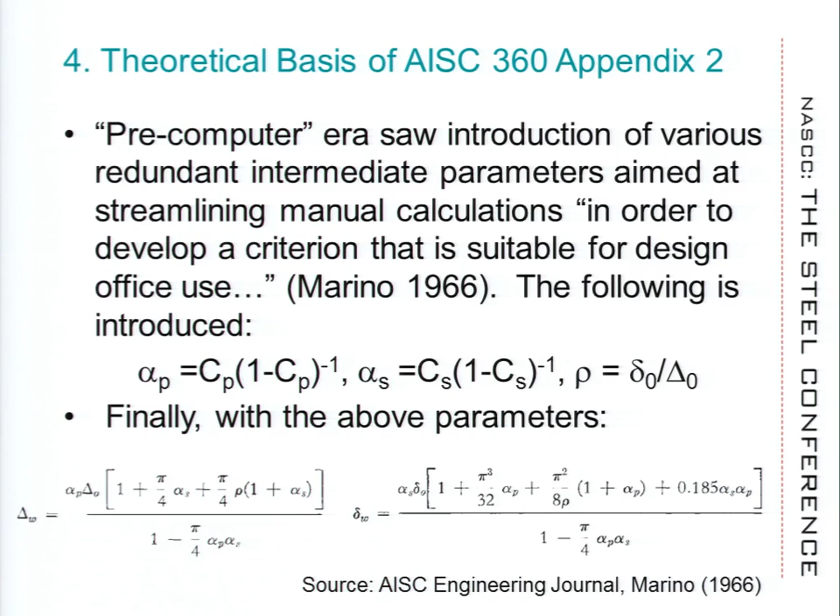So along the way, from this equation right here that was derived in terms of basic terms of the displaced structure, the following was inserted, and this is just to group your variables. This doesn't really have any clear physical meaning. But if you substitute all of this into the equation we just derived for that one particular problem, you will get those two equations. That's all you need to know to execute a ponding analysis for an elastic structure.

Okay, now let's look at this. Here's this equation again. So you have the equation that defines ponding displacement, the displacement under ponding itself, for a beam and for a girder. Girder is to the left, beam is to the right.

There's a statement in the commentary that Arvin mentioned earlier, related to the simplified criteria in Appendix 2. What that says is that the simplified criteria, at the very bottom of the page, Cp plus 0.9 Cs less than 0.25, contains a margin of safety of 4 against runaway deflection, against instability. It doesn't mention stress at all, just instability. So it leads to the idea that by providing a factor of safety of 4, your stiffness will be so high that, in turn, your stresses will be so low that you'll be nowhere near a situation where strength would control your design.

But let's see what you know. Like I said, it merely mentions stiffness. But how can you assure that you don't get a runaway deflection? Well, it's really simple. You want to make sure these two terms, which are the same for both girder and beam, don't run to zero, in which case deflection runs to infinity. So you want to make sure that doesn't happen.

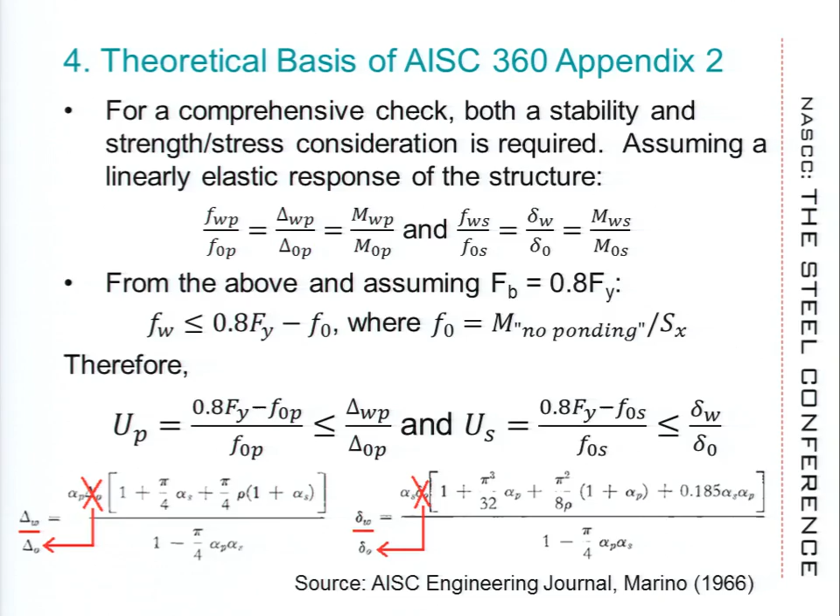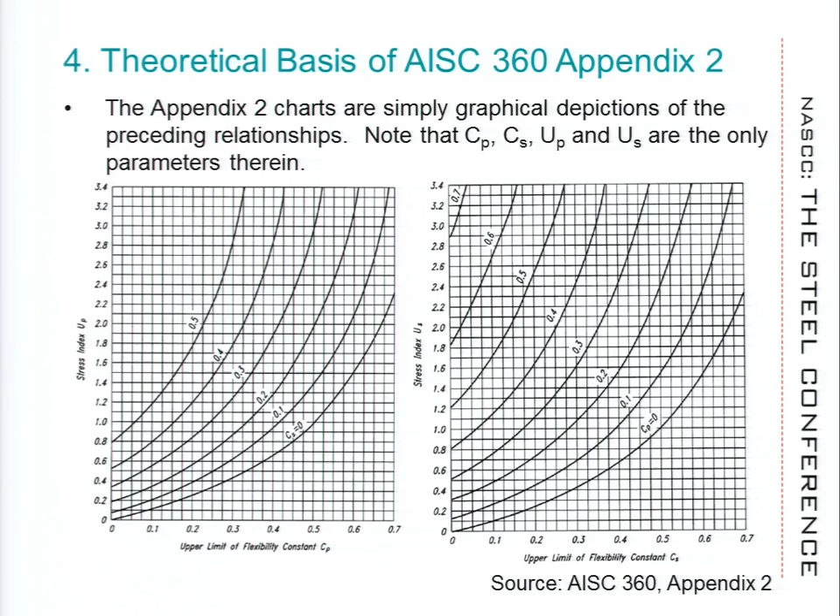What are these charts? They're really nothing. They're just graphical aids that relate these deflections to this stress margin. So if you know CP and CS, you can see whether your stress is okay. Or if you want to max out your stress and you know CP, then you can see what stiffness you need on your beam. And if you know the stiffness of the beam and want to operate within the stress margin, you can determine what stiffness you need on the girder. Nothing more, nothing less. It's just a graphical aid.

We looked at the first assumption in this development, which is this sinusoidal shape of the displaced beam and load diagram. But what else did we see here? All beams are uniformly spaced. A beam occurs at midspan of the girder, that's how the beam was formulated with load on it. All beams have equal flexural stiffness, so there's no stiffness discontinuity, and all girders have equal stiffness.

All bays are rectangular. That allows this LS and LP variable usage in this formulation. Furthermore, loads on girders assume it's the same beam length before and after the girder, so all successive bays are exactly the same. Roof deck never reverses direction, so your girder is always a girder, never a beam. You don't have a situation where a beam becomes a girder because the opposite bay flips direction.

Maximum effects: all maximum effects correspond to the midspan. So if you have something that would throw your load off, initial or otherwise, ponded load or initial load, it may not work for you.

Snowdrift, presence of mechanical units, and so on. Loads other than water are uniformly distributed. Water obviously is not, because it correlates to this sinusoidal shape of the displaced diagram, but everything else must be uniform. It's just expressed in PSFs.

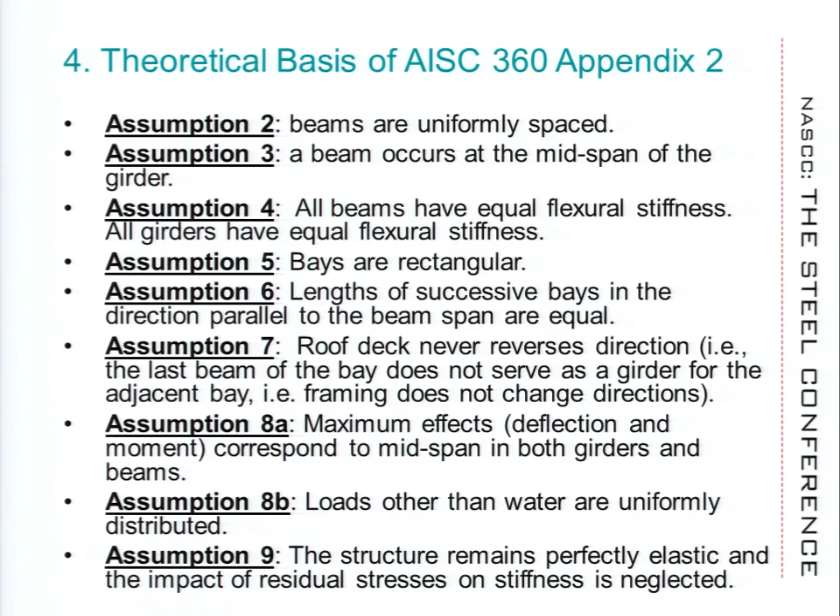The structure remains perfectly elastic throughout the process. There's no consideration of residual stresses and how that might chew on your stiffness along the way and increase your displacement, consequently bringing you closer to instability.

All framing is perfectly flat, including that of the adjacent bay. All members are pin connected. Marino makes qualitative statements about why you could use this methodology for continuous framing as well, but that's neither here nor there. You can actually identify quite a few cases where that doesn't work all that well.

There are no axial loads. If you put even a small axial load, remember this is a stability problem. You're trying to avoid a runaway deflection. If you put a bit of an axial load on a beam, you can accelerate that process a lot further and introduce an additional analysis step in this process.

There's no member camber. Strength of beams and girders is limited only by flexural yielding. So think about the 1989 spec: FB equals small b equals M over S. You have an allowable stress, and although we don't know the source of 0.8 Fy, it implies that members are not subject to lateral torsional buckling. Members are such that their strength can be ascribed in terms of 0.6 Fy with some arbitrary stress increase.

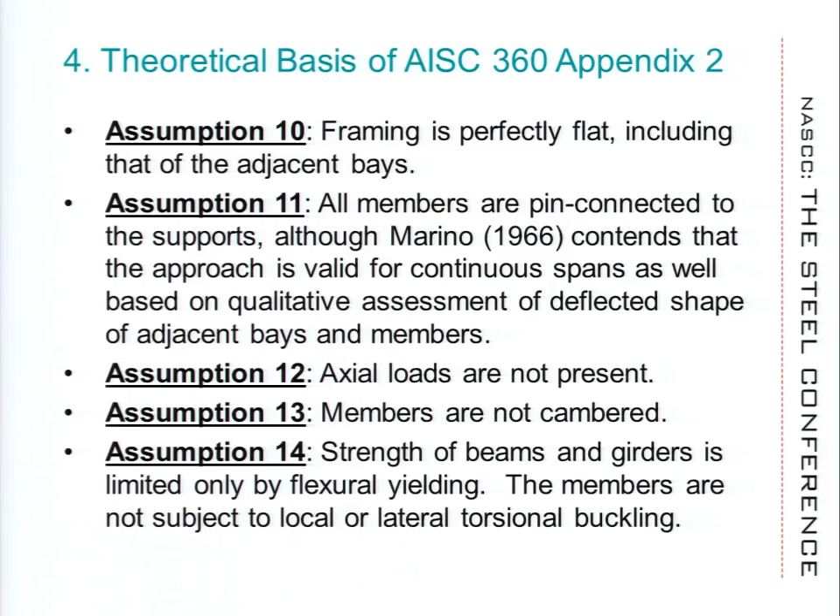All framing is orthogonal. There should be no skew members, and there are no skew members in this little numerical exercise by Marino. There's no impact of non-structural elements, so if you're sloping your insulation to run the water onto a bay or run it away from it, that's really not considered.

There's no consideration of any sort of imperfections. That may not be a big deal because you are applying load in the direction of instability just through initial load, but there are cases where it might be a problem, as we will review a little later.

All members are prismatic, there are no tapered members. All girders frame into a non-deformable support, a column. A girder cannot frame into a girder, otherwise you have another degree of freedom to consider.

Adjacent bay framing is the same as that of the current bay, otherwise you might have to consider the impact of continuity and water runoff among successive bays. Those are assumptions that went into that little numerical exercise. Technically, if you don't have that exact same situation, you've got something else going on. But that's in Appendix 2.

Not all of these are conservative. Some are not. But in any case, it illustrates the point that you can quickly get into trouble unless you think very critically about what you're doing along the way.

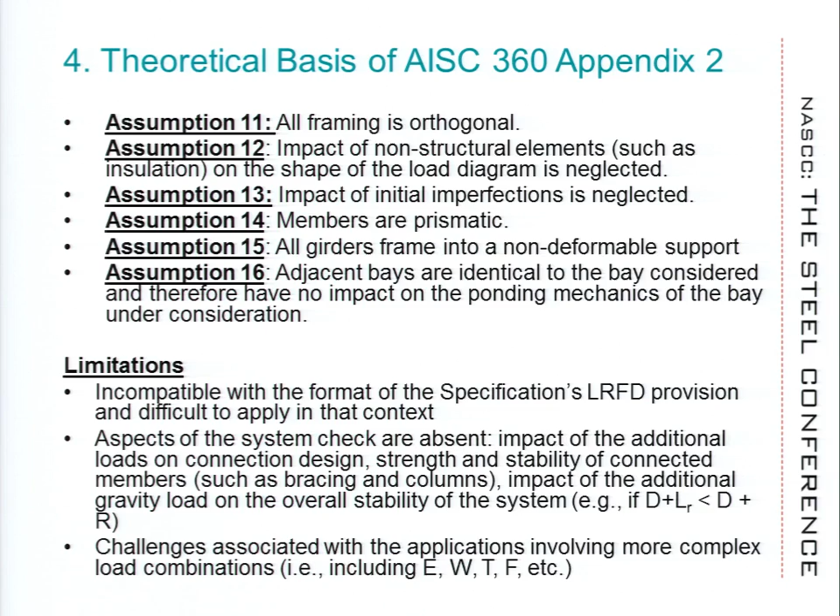If we have a more complex loading combination, this all falls apart. If you have a situation where, per ASCE 7, rain loads are combined in at least one load combination with seismic and wind—although that may not, and it's not likely to govern your design—if you put, like I said, an axial load on the beam, that introduces an additional order of problem.

Let's look at some computational approaches. This is a summary of the issues. So we have these two things in Appendix 2.

One is what we call the simplified method. It's this equation that virtually nobody knows where it comes from or what its physical meaning is, and it's certainly not commensurate with what's explained in the commentary.

Then we have the so-called improved method, and that's the classical Marino method. But I want you again to think about that Marino method as a numerical solution of a particular problem, not a method in itself.

How do we handle geometric limitations associated with Appendix 2? What other methods are out there to look at this thing? How do we deal with LRFD, and what would be the best thing for the specification to do in the future?

So I identified three groups of methods. There are these Marino spin-offs—they came after Marino, a series of papers by people who felt they should say something about what Marino did. Sawyer published a paper.

He was, I believe, a professor at Auburn University at the time, and he accused Marino of not considering crookedness, the initial imperfection of the member. So he went through this elaborate exercise, but this illustrates an earlier point.

You've got these parameters that mean absolutely nothing: AP, BP, AS, BS, beta P, beta S. They're all intermediate variables used to group your variables. But the equation looks scary, it looks counterintuitive, and if you're looking at it, what's your first instinct? Well, you plug the numbers in and you spit something out, right?

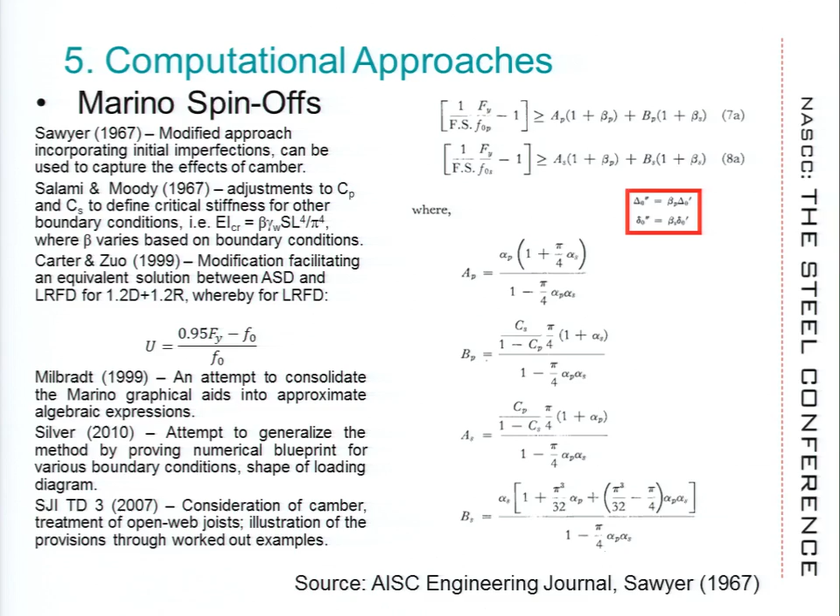There's SJI Technical Digest 3. It's useful, gives some insight into how you consider camber, and further insight into open web joists, which are also explicitly addressed by the AISC 360 spec and Appendix 2. It gives you some worked out examples to help you along.

I'm going to expedite this slightly now. There are Marino prequels, the studies we referred to earlier, but I want you to think about this second study here, the second part of Haussler's study. His study was numerical. He described the beam behavior, the displaced shape of the beam, in terms of Euler-Bernoulli equations, basic principles, and he thought about this carefully. But he threw out an interesting point based on his observation of his numerical problems rather than observing anything out there in the field.

Basically, it's as prescriptive a ponding provision as you can get. If you apply 5 PSF to a roof and you have half-inch deflection - it's a pure measure of controlling stiffness - you may or may not get ponding problems. Under half an inch, you're probably okay. If you have over 1 inch of deflection, you're probably unstable. How's that for a simple criteria?

There are new and other ways of thinking. I'm not going to mention factory mutual, other than there's something in there about ponding, but it has more to do with verification of actual slope than with any particular methodology.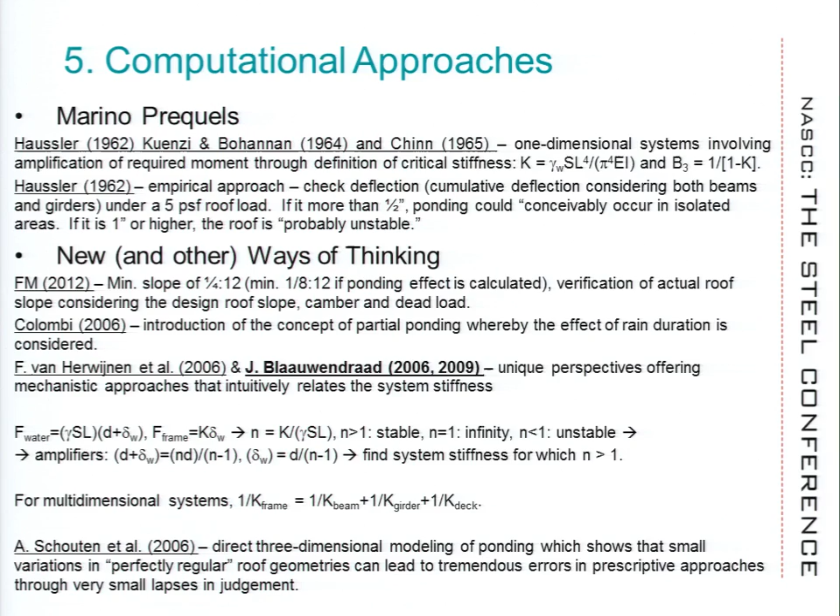We've gone through analysis here. Blaauwendraad and Herwijnen have similar approaches, except one likes to use the half sine cycle to describe his load and his displacement diagram. The other guy wants to get away from it, and he wants to convert his half sine to uniform. But if you convert uniform load block to half sine, you can see that your displacement and moments are both relatively equal.

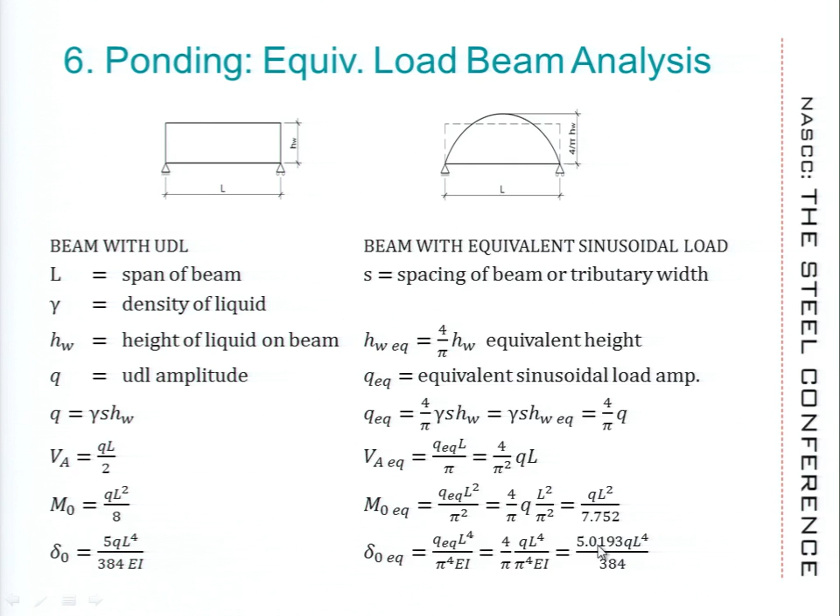There are a number of physical analogies you can draw to that, but this calculation is relatively simple and intuitive. Once you have the amplifier defined, you can relate your initial moment, your final moment, and then you have something to work with. You don't have these two distinct checks anymore. You have the moment amplification concept, something you deal with every day in Chapter C.

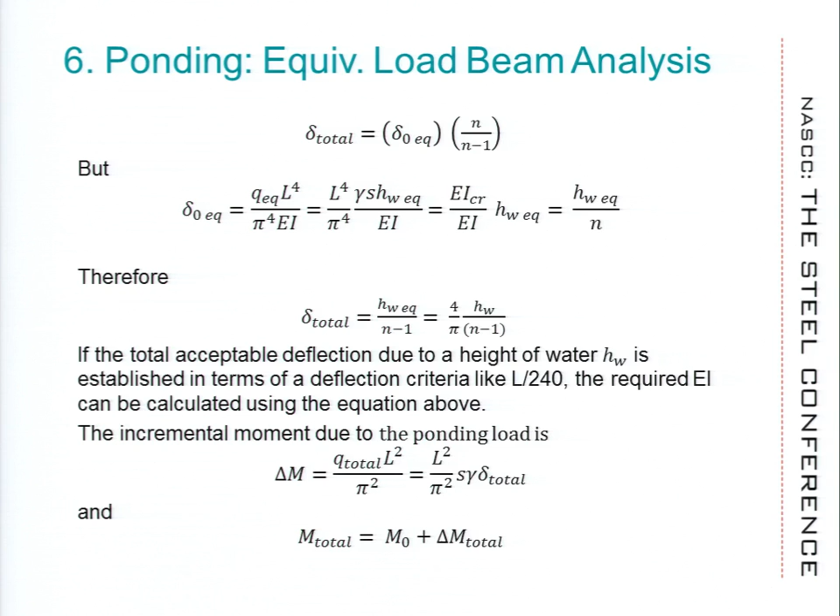Let's talk about this LRFD and spec stuff for a while. This is the basic mandate of Chapter C. I have 10 more minutes, Radar.

Let's look at the general mandate in C1. What is it that you have to do in a structure? You have to consider these five things. How you do them is up to you, there are multiple ways of doing it. But flexural, shear, and axial member deformations and other deformations that contribute to displacements of the structure, you must consider. You must consider second-order effects.

If we have a problem that we analyze using this little Marino gadget that's not in Appendix 2, we kind of do those two things, right? We have some sort of an iterative function there, and so we consider these second-order effects, although ours could be termed even third-order effects because our load changes, not just our effects.

Our load and load effects both change with each subsequent iteration. Geometric imperfections - no, we don't do anything like that in Appendix 2 explicitly, although we do have initial load that sort of covers that. Stiffness reductions due to inelasticity and uncertainty in stiffness and strength - no, we don't do any of that. And then all load-dependent effects shall be calculated at the level of loading corresponding to LRFD load combination or 1.6 times ASD load combinations. We certainly don't do that.

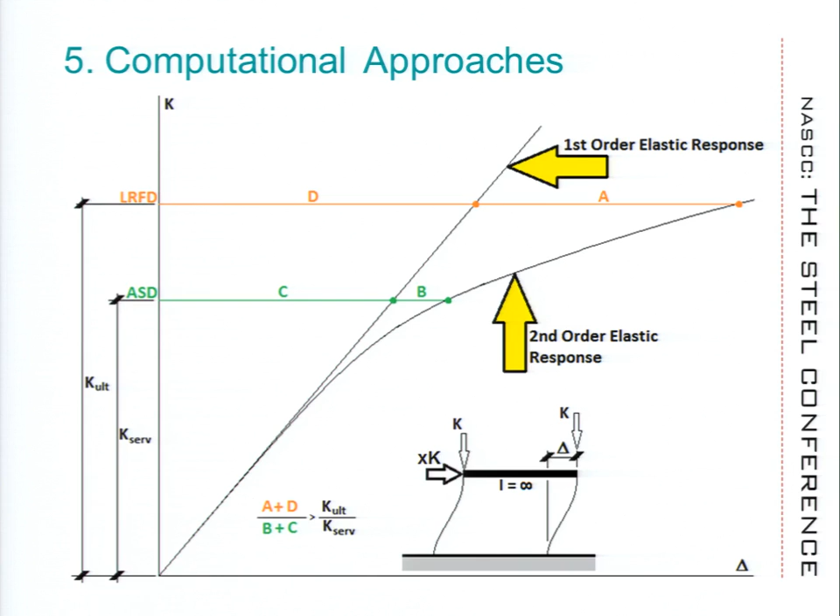So think about Appendix 2, though. We don't kind of do this and we don't consider this. We just do this ASD thing, and then there are some attempts in the past to convert it to an equivalent LRFD solution.

But let's think about how we do this thing with amplifiers in Chapter C. Let's draw some analogy. Imagine, as we said earlier, the only thing that you need here is definition of deflection, and you have that. Then you can generate your own solution for any custom loadings or custom geometries.

But imagine if, as part of Appendix 2, the only thing you had to do is compute a moment demand, and you do so by configuring these amplifiers, which are expressed in terms of ponding and initial deflection. Then an alpha amplifier commensurate with Chapter C could be inserted to force you to use LRFD loads to compute these second-order effects. So, unless our math is wrong, you would associate that with the ponding portion of the effect.

The initial effect directly in this equation, and then within the ponding deflection equation itself - this is the Marino equation that I've simply rewritten without all these meaningless variables. So it's as simple as that.

Simple calculation, and then we are left with this very intuitive critical stability - critical stiffness to actual stiffness ratio. And then if you believe that residual stresses are important and that you should somehow consider uncertainty in your stiffness, you can also plug in 0.9. That's completely subjective.

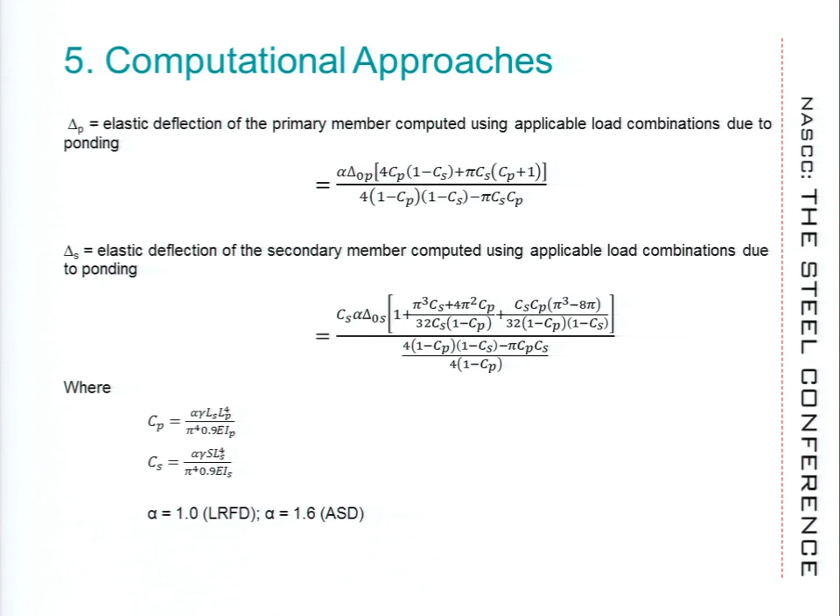What that lets you do is go to Appendix 2, compute your required moment, then go to Chapter F and find your capacity and see if you're okay. But basically you're just satisfying this basic specification mandate. That's all you're doing.

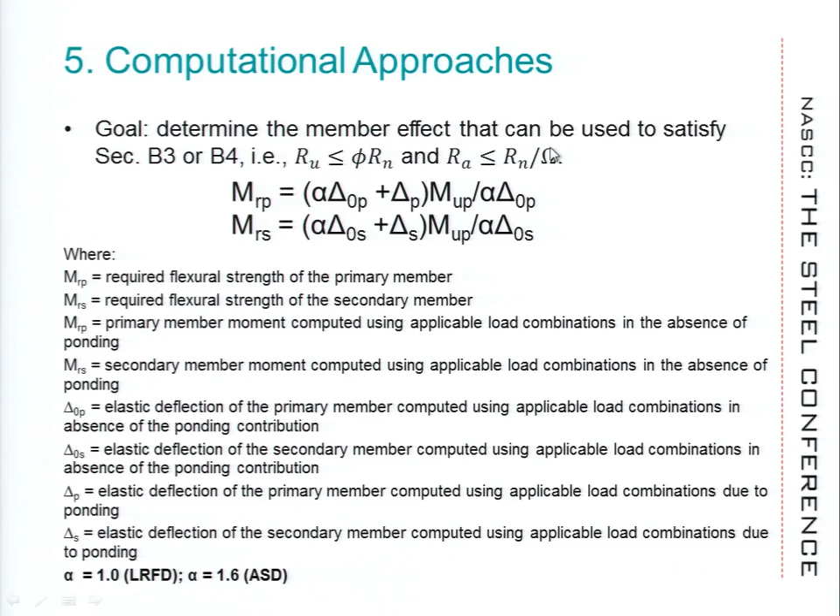How do you deal with AISC Appendix 2 geometric limitations? Well, don't use Appendix 2. But if you have to, always err on the side of lesser stiffness, higher displacement, and larger initial load.

Larger initial load may not be relevant for a system that will converge to stability - might not be relevant from the standpoint of stability, but it'll be relevant in terms of what your effects are that you compute for checking your strength equations. There are some examples here.

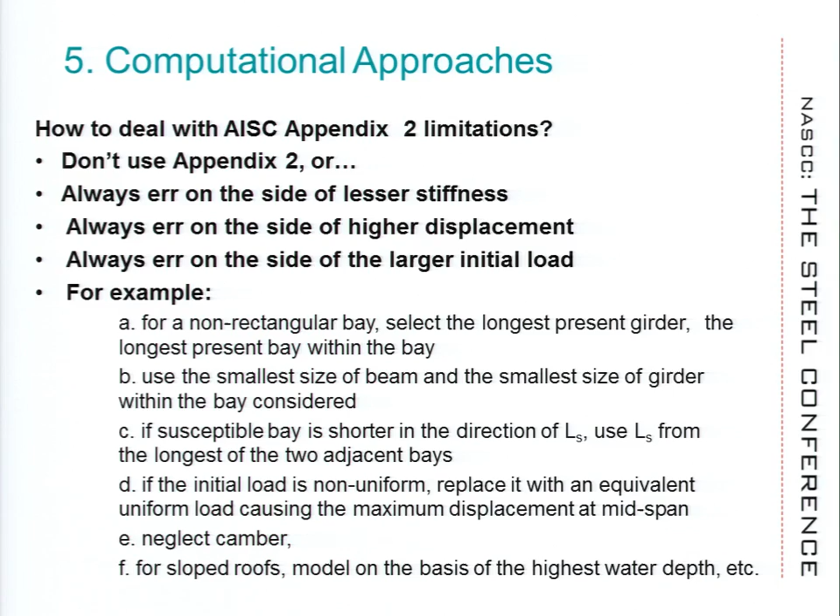There's no sense running through it, but if your LS parameter is different, your bay is skewed, use the largest LS. If your two girders are different, use the one with less stiffness, and so on. But exercise critical judgment. Let's look at this very quickly here.

Think about these studies by Chinn, by Haussler, by Kuenzi, Bohannan, and Marino. What do they do? They use these classic methods people learn in undergraduate studies: compute deflections, moment area method, conjugate beam method.

And these equations kind of look scary in the papers unless you go through them critically and break down how they arrived at what.

But let's go back to where all that came from, which is the Bernoulli-Euler simple beam equation, something we've all seen in our junior year of engineering curriculum.

Why is this important? Because you can write an equation for just about any loading condition and any moment condition along the beam based on what's actually present in terms of load and stiffness, whether your load is uniform, a function of your length, or whatever else.

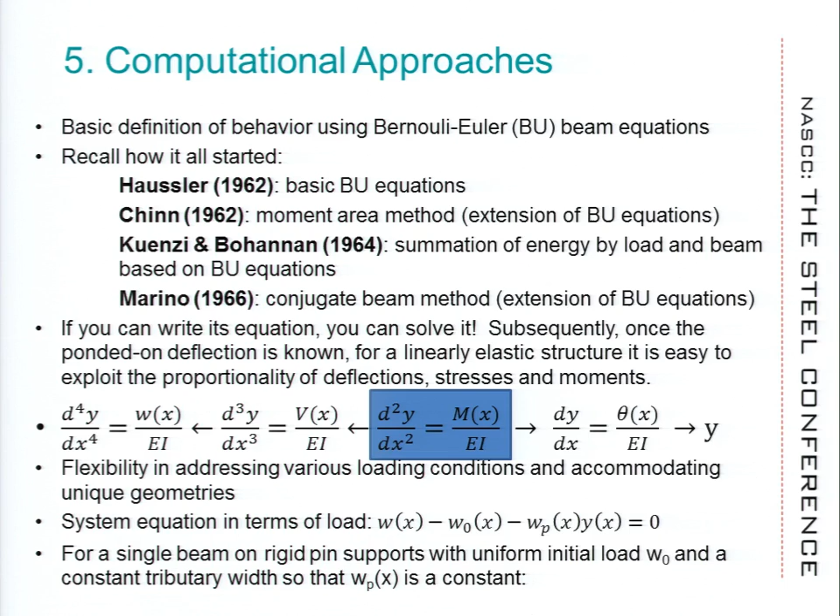But then let's reduce that to a very simple case where W is a constant and the tributary width to the beam is constant, so WPX is also a constant. You get that basic equation there. Now it becomes a fourth order differential equation.

But there are these things nowadays, you don't have to do this by hand - there's Mathematica, you can plug this in and solve it. So if I just plug that very thing into Mathematica, which I did, I got this general solution.

Mind you, the only thing I'm after is my deflection - that's all I need to solve this elastic beam problem. And then if I put some conditions into this general solution, I can get a particular solution, which gets numerically pretty hairy, so I'm not going to show it to you.

But if you go to this paper by Silver, he did a very similar thing, and I really admire that work. He actually thought about this critically, and it illustrates you can solve just about any problem using this very basic concept that's 1756, almost 250 years old.

What the heck, I'll show you the particular solution, that's it. Anyway, that's not that scary - it actually reduces relatively quickly, but there was just no time to do all of that.

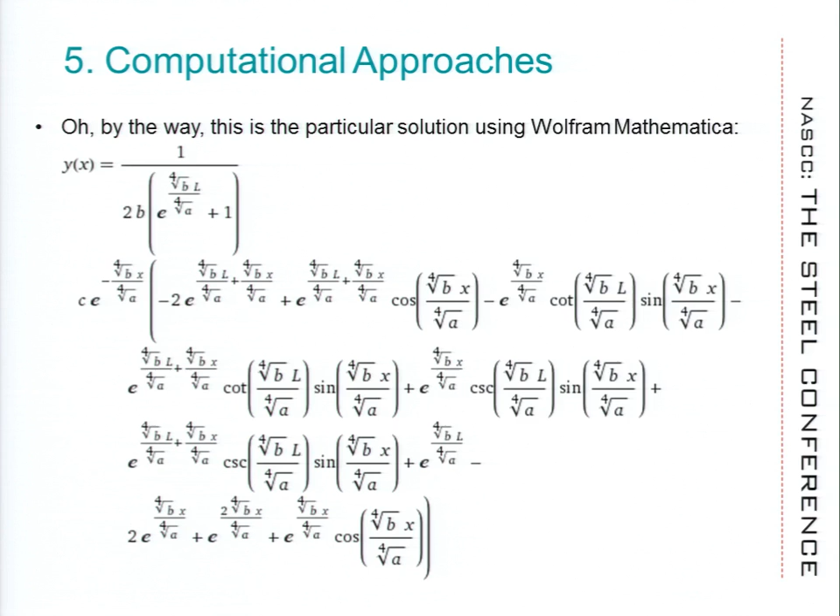Iterative approach. This is one or two last slides.

You need a couple of things. This describes it graphically. We don't need to go into great detail, but if you believe that you should compute your stability-related effects using factored loads, as specification chapter C tells you to do, you can apply initial load and simply keep track of your deflections, executing steps of analysis. The only thing you need for this is first-order linear elastic analysis. You're just using that program as a bookkeeping tool for your deflections and subsequent loads.

That's all you need. You just go from cycle to cycle, taking some judgment in how to divide beams, but what you must assure is that your program can handle cumulative deflections from beams and girders, not just beam deflections with reference to its ends. If you can do that, you will very quickly find whether your deflection increments grow or not.

If they don't grow, that means you're going to eventually become stable, and once you do, at your very last cycle, you will have loads to work with. You'll have deflections computed. You'll have moments. You'll have your shears to design members with. You'll have connection forces. You'll have everything.

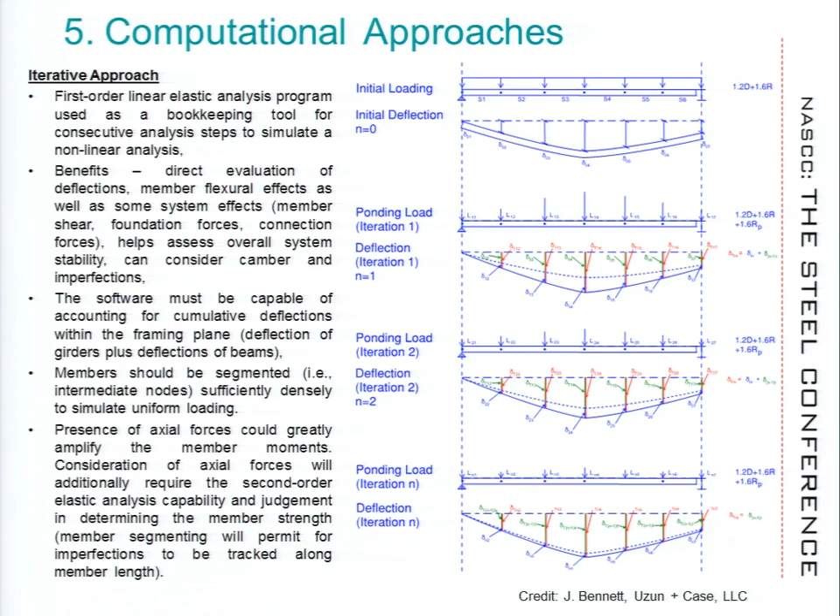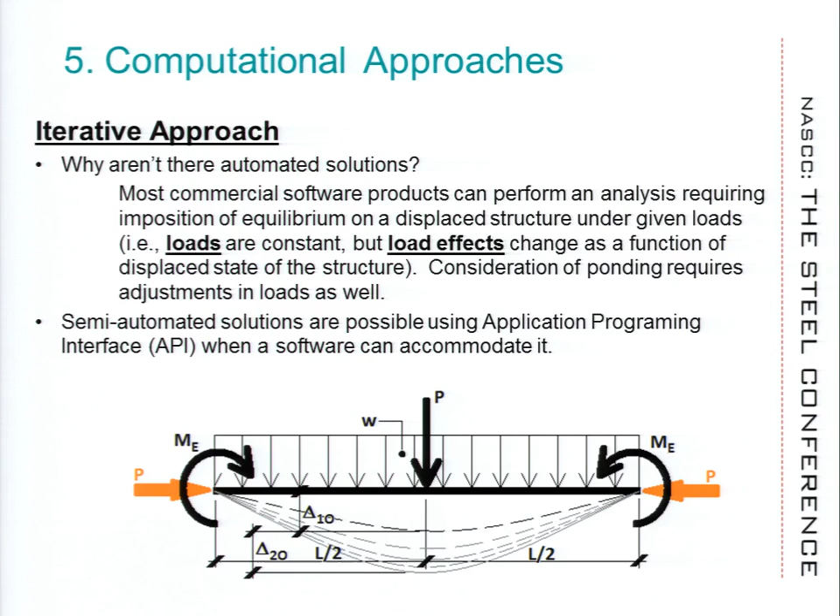If you have an office building with, say, 40 column sticks and 160 beams, would you really do this? No, but it's really useful to solve failures, to solve complex problems, to determine what exactly happened. Why aren't there programs to do this? Because there are programs that can impose equilibrium on the deflected shape, but there are no programs, to my knowledge, that will also iterate loads.

The ideas on this are all over the place. There are people who say this really never happens. There are those that say it happens all the time. And there are those that say it happens in this region under this condition. One last thought: what we came away with from reading these studies is that if you have a ponding failure, it seems there's generally some other underlying condition, where ponding then becomes a contributing factor rather than the sole cause. I'll leave it at that.

There are some other slides here, but we don't have time for that. Thank you very much.